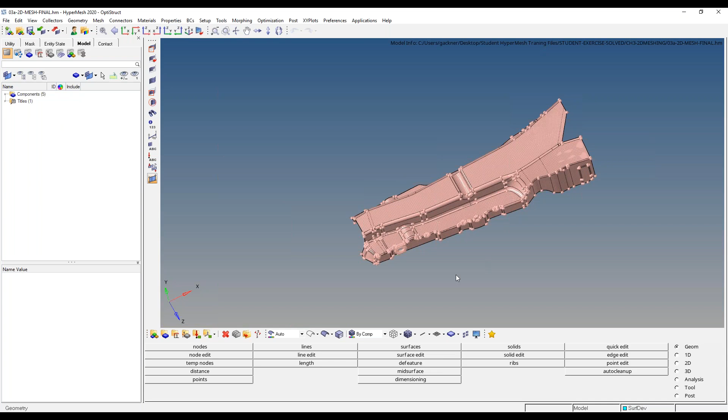Now, outside of the theory, we spent quite a bit of time learning about the 2D auto meshing tool, as well as ways we can assess element quality. And what we'll remember from that - I'm going to actually pull up the model we left off on from Tuesday afternoon together - we'll remember especially from Darius, who was good about preaching this, that an easy way to assess your mesh quality is simply to do the old eye test. Darius had described it, and I would completely agree: if your mesh is relatively aesthetically pleasing, that's a good chance for it to be a high quality mesh.

The other half I can add in here is from my mini lesson on mesh uniformity. Those of you who remember from Tuesday know there were a couple different ways we could think about mesh uniformity. One of those being: are each of my elements as uniform and identical as possible from one to the other? And at a bigger scale, are features like fillets and holes being modeled and meshed the same way as they repeat throughout the part?

Both of those ideas of mesh uniformity are rooted in the same thought: you want as many apples to apples comparisons as possible in your FE work. You want to feel confident when we see results this afternoon that the stresses I'm seeing in one element are comparable to the stresses in another, without having to do mental gymnastics to relate them. We want to take them at their surface value and say that value is smaller for my stresses, that's the better design. That's how easy we want the interpretation steps to be.

It's tough to see without a mesh, but when we get there together this afternoon and you see those results, there's so much going on and you've already put so much work into it. We don't want to make it any harder than it is to say, I know with confidence this is the best design, or I can look you in the eye and say the car will make it 100,000 miles or cycles. That's the kind of confidence we want when looking at results.

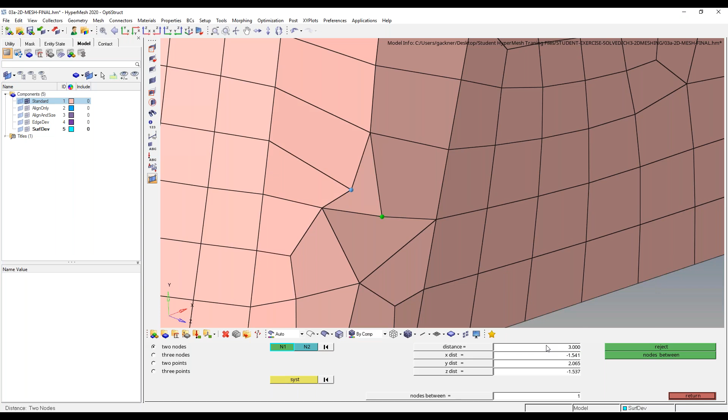Just as a very interesting example here, let me just turn around and take this quad element here and start to shrink this guy in. You could get some quad elements that look like this arrowhead little structure here where it's starting to kind of invert almost. You could see elements that will do something like this, and now it's truly overlapping itself.

Now, these are things I would not expect to typically happen, but through a combination of some manual cleanup efforts like I'm showing here that I've picked up with my own expertise over the years and some funky geometry files, once in a blue moon, you can see some pretty catastrophic things there.

So certainly something as porous as that, where there's intersections and overlaps and all sorts of twists and pretzels thrown in the mesh, a lot of times the solver won't even bother to go through with the rest of the job submission and just say, listen, man, the mesh you just gave me is trash, it's garbage, it's no good. I don't want to solve it. You got to fix this up. And usually solvers are good about telling you the element number that failed and little things like that. But that's the approach we want to take with it.

So you might hear people talk about quality either in terms of its worst element, like I've described, or another common scheme could be talking of element quality in terms of percentages of elements that meet a threshold. So I've worked with some of my customers that'll do it where they have a very strict quality requirement where 90-some% of the elements need to meet that requirement, and then the remaining 10% just needs to meet a very, very simple threshold just to ensure that it will pass the solver checks.

So that's another way of thinking of it, a majority high quality element mesh with some poor elements. Some people only think of it in terms of a worst case scenario element threshold. Long story short, they're all coming back to the same idea. What can we do to ensure that we're getting as many of these perfectly lined up or as close to squares as possible and not this kind of junk here?

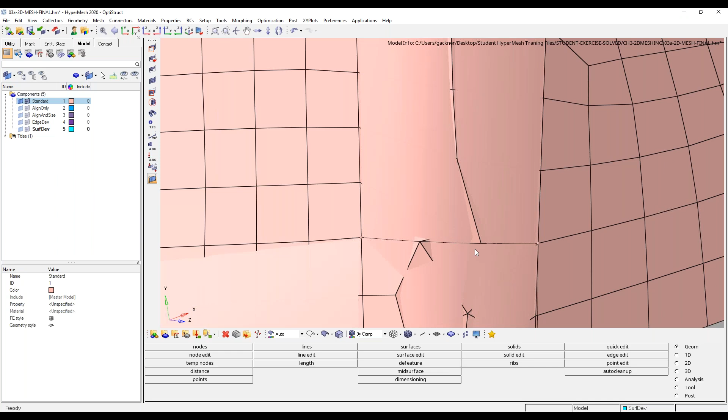And hopefully, knock on wood, HyperMesh never makes you feel that disempowered with the tool there. We want to build you guys up. I want you feeling like a superhero when you're going through the tool. In my opinion, once you are in HyperMesh, it is the closest thing you will ever get to feeling like an Avenger. I could be totally wrong. I am not Robert Downey Jr., but I feel like a God-blessed superhero when I'm flying through with HyperMesh. And that should be everyone's goal in here. And I promise you, if you're struggling through it and you think, I know I can do this, I know I can get there, that light bulb moment, it's glorious, folks, and we're getting to it.

Now, how can we actually get there, then? So what I want to show us next here, I'm going to take my Spotlight tool, and I'm going to come back into my 2D mesh menu here. I have shell elements on the screen. I have 2D elements. I want to continue to work with those. There's a very helpful tool with editing an existing mesh, and it's kind of hiding here in my second column to the right here.

So again, I'm in that 2D menu, column over to the right here. There's a little hiding tool in here called Quality Index. Quality Index has a lot of great kind of macros built into it for us. Now, it is a two-part tool. It's kind of both whole and parts. It's not just one or the other.

And how this tool works is it allows me to establish a quality threshold or a quality criteria that I'm interested in, so that it actually comes in here and lets me establish my quality threshold for failure. So I mentioned earlier that there's some files in there that you might remember from Tuesday that actually store this quality criteria, and it's that same file. So we learned about a preference and criteria file earlier on Tuesday that can be used to drive geometry cleanup.

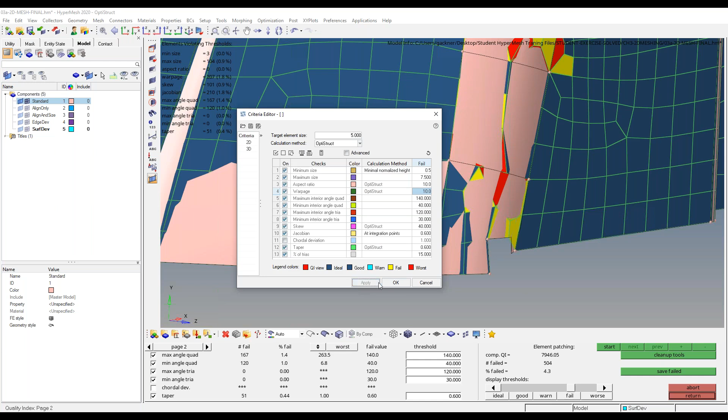So maybe I want to make sure all of my elements are at least 0.5 millimeter in size. I want to make sure my aspect ratios don't exceed 10, and I also want to make sure my warpage is no bigger than 10 degrees. I can establish those thresholds right in this file and hit OK. Why I bring that up is when I come back into my quality index tool, this quality threshold that it's showing here is pulling it straight from that file.

So why I like this is if there's only a couple checks you're concerned with, right now we're just going to consider minimum size, aspect ratio, and warpage, and I'll leave Jacobian in there too. We'll just do those 4. I can actually just turn off the rest for now. And now what I have is just a very easy way to assess my mesh quality. So actually what this tool is doing is it's updating the contour to show me elements based on their quality.

Any element in red has already failed the quality criteria. Any element in yellow hasn't directly failed it yet, but it isn't necessarily that high quality, and it's closer to failing than it is probably being perfect. So this is a cool tool to really help you identify where things are failing.

And I know it's kind of grayed out on the screen, but at the top of my session here, it's also listing the number of elements that are failing each check. So I'm going to just come into that preferences menu and go to my colors options.

And I'm going to not force those to be black. There we go. Hopefully that's a little easier to see now. So I can see here that most of my elements are above that 5 millimeter or 0.5 millimeter limit. Nothing has a bad aspect ratio exceeding 10, but there are a couple elements failing my warpage check and a couple elements failing Jacobian. So some very, very basic tips here for quality cleanup.

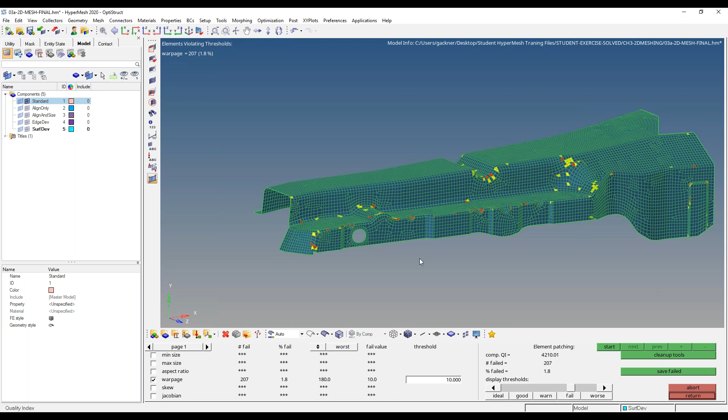I'm going to cheat here and just make that the only quality. And sure enough, all of my elements that are warping are virtually either at this curved region here, this larger fillet here, as well as these fillets down here. Now there's something funky really going on with that mesh flow there. We're going to come back and investigate that. So as a rule of thumb, warpage is typically going to happen from curved areas.

Now, if you have many, many elements on the same curved surface failing a warpage check, what that can be telling you is that you probably have too large of an element size to capture that curvature in a clean and accurate way. Let me demonstrate that for a moment here. I'm going to just hide my mesh here, and I'm going to just make a new component for reference. So this is just a new component that we're going to refer to. And I'm going to start meshing that part again at just a couple surfaces here. So I made the separate component just so that way I could keep things clean.

So one thing I hadn't mentioned yet is in your meshing tool, it'll always default with this option here labeled elements to surface component. What that's saying is as this meshing tool makes new elements, it'll place those elements in the same component that the geometry file belongs to. And that's great default behavior. That prevents you having elements in a separate component from the geometry of that component. Now, this is an example of where I want to keep it separate because I want to have a second mesh to play around with. But for the most part, it's very straightforward to keep those the same, and I would recommend you do so.

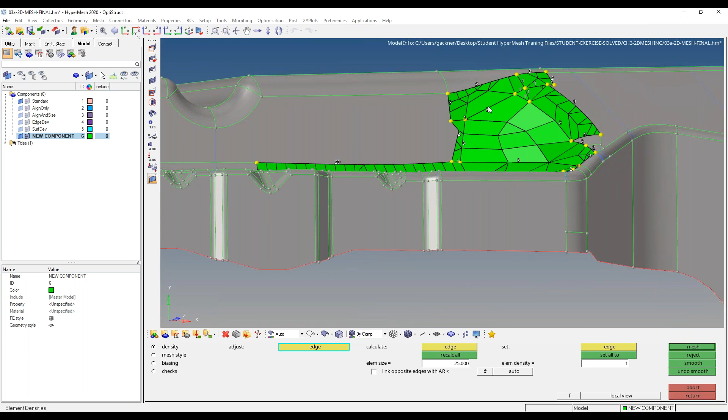So what I'm going to do is just throw on a sample mesh of a very coarse mesh size, maybe something like 25 millimeters here, an entire inch element. And I'm going to come over to this surface here, and I'm going to start meshing that. Now, certainly, it's very, very ugly. I'll give it the old college try to at least give it something that looks better here, and I'll talk about why in a moment this is meshing kind of ugly. But that is the couple elements I have to consider.

And if I come back to my quality check tool with the old F10 and run that warpage check, I shouldn't be surprised, and I'm not surprised knowing what I know, I've done this a couple times, that those are warped elements. I'm asking a straight edge to traverse across a much bigger chordal region than the smaller element to approximate curvature. It's really no different than an exercise of trying to approximate a circle with 4 edges versus 8 versus 16 versus 64.

And I think we'd all agree that you're going to have less angular deviation as you introduce more straight lines. So that same principle is happening here with warpage. So I just wanted to include that kind of thought process as an example of: the more you start meshing, you're going to really start to build an intuition on why elements might be failing. And those are also going to start to factor into your decision making on what your element size should

be. So I'm seeing here from trying to mesh this with 25 millimeter elements that maybe that's a little too big. Maybe we need to refine it to reduce the amount of warpage those elements are seeing. So maybe I'll come back in here and, just for the sake of argument, bump that down to 1 millimeter now. And now all of a sudden, first off, it looks good on the eye test, and the eye test usually treats me very well. But I can also come in here and see that there's a lot less warpage failing happening.

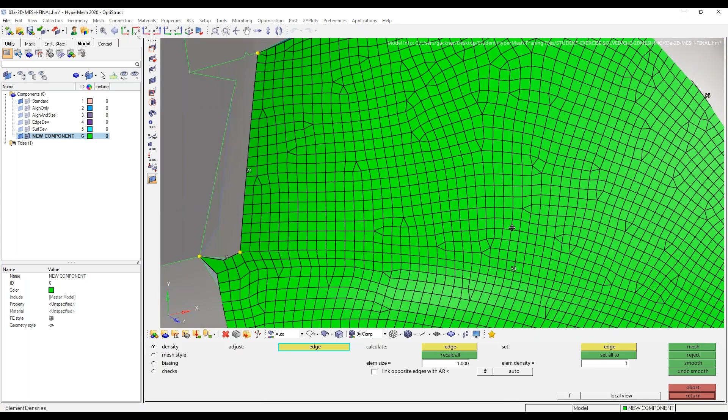And certainly, though, it's also okay if not every element is perfect in its exact size either. It's totally okay if you're going through this and you find out, yes, I'd be willing to bet these very, very small 1 millimeter elements don't warp at all. And I only have one of these guys failing, and it's probably going to happen at the very end of the mesh. Yep, it's this very long one there. But just because none of these are failing doesn't necessarily mean this is an appropriate mesh either, because I'd be willing to bet we made these elements too small, or smaller than we really need to.

As a general rule of thumb, you're not wrong for thinking that as your element size decreases, your solution accuracy goes up. So let's just pretend that we're only doing cantilevered beam models. And cantilevered beam models are nice because you can, for the most part, create them in the real world in a relatively easy controlled environment. You don't have to jump through that many hoops to create a cantilevered beam model in real life. So let's say we did one of those and we had the FE model for it. And now we want to compare our FE model to the deflections we saw with the real world model.

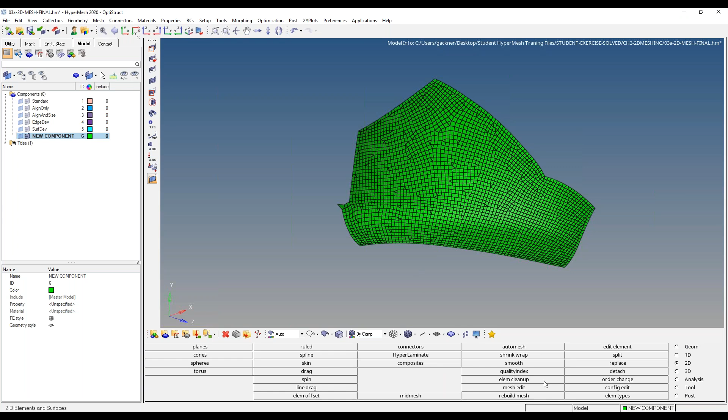Now, I promise you, we're going to learn some ways to repair these low quality meshes. And let's do just that. So I'm going to come back to this real ugly pink guy here that I just took a fat chunk out of. And I want to come down to this region here where there's all sorts of nonsense happening. This is straight no good. So what I want to do is navigate back to that quality index tool.

And we've learned how I can pair this with my criteria file, and I can actually call out failed elements for all these checks. So I want to know my really small elements, my stretched elements in terms of aspect ratio or in terms of Jacobian, as well as my warped elements. So I got just a handful of checks up on the board. I got some warning elements and I have some failing elements here though. So it's good to see both there.

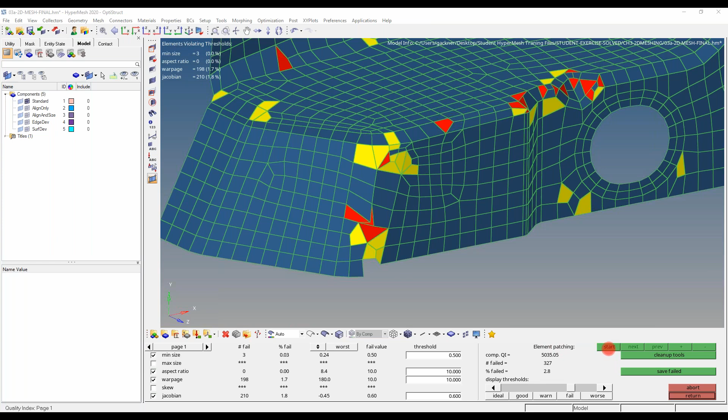Now, there's two ways to fix elements. And this is going to be approach number one we're going to learn about today. Quality index tool is great because it'll also do what we call element patching, or isolating these regions of elements for us. So I'm going to come over to the tool and I'm going to hit start. What this is going to do is start cycling me through, and I can hit next and previous to go to the next patch of elements. So I don't have to spin my model and zoom in and out to find these. It makes hunting down those few failed elements very trivial for you.

You shouldn't have to spend time doing the old spin around, zoom in and out, identify that one failed quad element of 100,000. I've called out a few bad behaviors if I find you doing them, not that I ever could, because I will most likely never meet the folks in this room. But if I do ever find you playing the needle in a haystack game trying to find a failed element, I'm gonna be in your ear a little bit about it. But fortunately, this patching tool takes away ever having to find the needle in the haystack with your failed elements, because it allows me to just cycle through these.

Not only that, hiding in the tool right under that patching tool are cleanup tools. These are really why we're interested in quality index. This is all pretty good. This is some lemonade in my opinion. I like lemonade, but it ain't making my day sort of thing. It's helpful that I can find my elements, but we already saw there's some other ways to do that. This cleanup tool business is really why we wanted to stop in the quality index tool. This gives me access to 10 different macros that can clean up all sorts of problems with 2D elements.

Some of the things I have in here, as a self-proclaimed HyperMesh expert, I use a lot of these in my own day-to-day. And some of the ones I like are this split quad element. We'll talk about why the node and element optimize tools are extremely powerful. And there's even a couple drag and collapse tools in here as well. So I'm going to start with node optimize and element optimize.

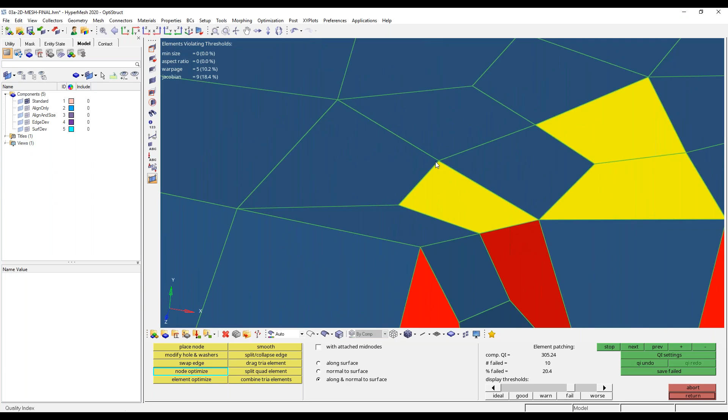So I can actually come in here and just start clicking away at some nodes, and it's going to start moving things around as it needs to. I can even let it deviate a little bit from the surface by moving normal off the surface. You want to be careful with that. Or you could let it do both normal and tangential to the surface. So there are some ways you can quickly clean those up.

I personally stay away from the normal option too, I only do along the surface. I don't want to introduce additional warpage to my model, but sometimes that's a necessary evil, you know, get it 1 degree off plane just to avoid significant aspect ratio issues. Those are the sorts of things we can do.

Now, a little more practical though is element optimize. It's the same idea, but it does all 4 nodes of one element. So I can come in here and just start clicking these yellow and red elements, and a lot of times, you know, you can get lucky and just 1 click fixes it. Now, the problem with these optimize tools is it can't always give you a good answer if the starting mesh was poor, like I'm seeing here.

But that doesn't mean we're SOL, because some of the other things I can do in here are splitting these elements. So I mentioned that there's an option in here called split quad elements. What this does, and this is a great solution for some warped quads.

Now, I would never just automatically default to, I got a warped quad, I'm going to cut it in half, now it can't warp. That will work, but if you do that for every warped quad, you can essentially double your element count in the model. So what the split is really cool for is taking an ugly quad like this that's really getting more trapezoidal or rhombus shaped than it is rectangular.

And these are good ones to use the split tool on, because what it will do is split it across one of its diagonals into two tria elements. Now, technically we went from one element to two, and if we keep repeating that, you can really substantially increase your element count.

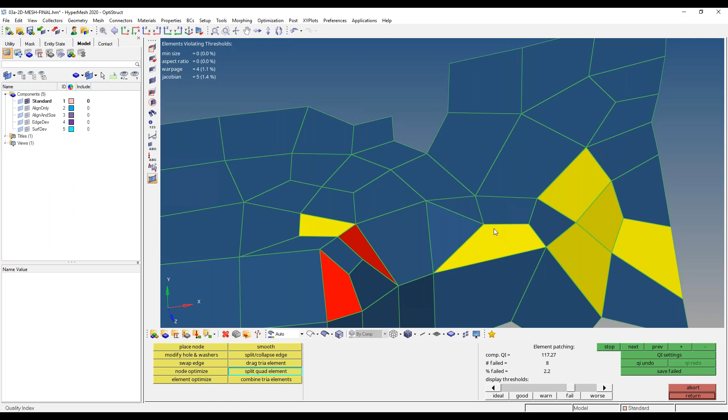So yes, this will prevent elements from failing, but we don't want to just blindly become the guy or the lady that meshes using only splitting our quads into trias and calling it a day. That is a horrible way to do things, boys and girls. If I catch you doing that, I'm going to get very upset with you, and I'm going to give you a tongue lashing.

Now, there's some other cool little tricks in here, and I don't want to do all of these tools, but there's a lot of stuff we can learn. My favorite one I'm going to demonstrate here for a moment. I'm going to borrow a mesh over here, go back to my quality index tool. There's a very fun tool called drag tria element on the far right.

I mentioned before that I spent quite a bit of time on Tuesday talking about that idea of element edge density, and how we can adjust those in the mesh tool to make sure we have ideally uniform density across edges, and that helps us get an orthogonal and quad dominant mesh.

Now, sometimes trias are a necessary evil for a given transition area, and there's a quick way to fix them if you forget to catch it in the meshing steps. So here, I didn't like that I introduced this tria element that I've highlighted in yellow on the upper right, and I don't want to go back and remesh the surface now. I just want to fix it.

So what this drag tria tool lets me do is click and hold that tria element, and I'm going to drag it while holding my left click. And it's like a zipper. It's going to open that up and just introduce all new quad elements that got meshed in there.

Those also go the other way as well. So I can certainly keep going this way, and like we saw, introduce it to the edge and add a quad. Or you could, what I call, close the zipper, and turn everything into a one-to-two transition as far as you can. So there's a lot of cool stuff you can do with that tool.

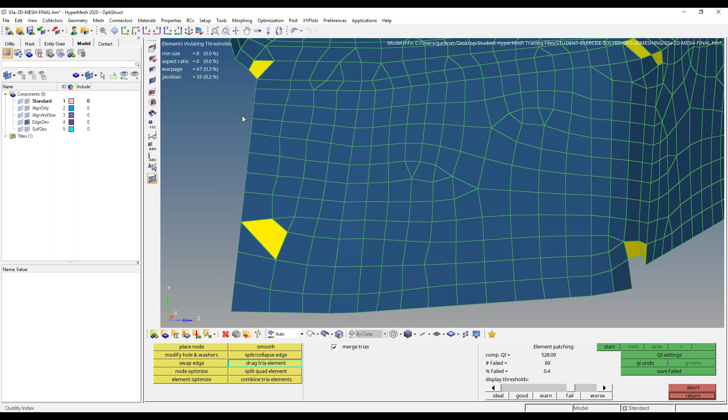That took me probably two and a half years of being on Altair to find that out, and I think I spent like my entire morning just playing around with that. It's very fun. And if nothing else, you can kind of show off to your friends, be like, look, man, look what I can do, I can make a mesh better than you. And then they'll have no idea what you're talking about, so it's okay.

Now, the other approach that I'd recommend to newer users for element cleanup isn't that quality index tool. I think what you guys should be taking away from this is a great local tool. This helps me with a couple failed elements where I can come in here and do that element optimize or node optimize, or split it in a worst case scenario to get one or two elements fixed. And that's 100% how this is intended to do.

Now, if you have something like that first mesh we looked at, this pink boy, that had all sorts of ugly nonsense on it, what this is telling me, regions like this coming back to it, is something happened at the initial element creation, and I can almost guarantee you it'd be quicker to just try to remesh it than to go back and try to make it work with some cleanup operations.

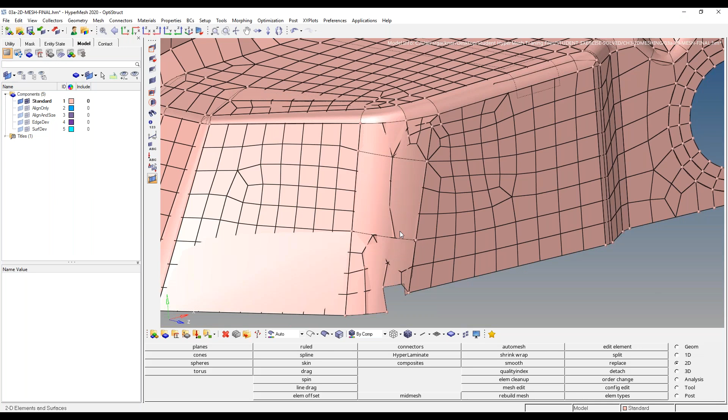So what I would do for something like this is bring the geometry back into play in your model browser. Right now, why this display looks so ugly is because we have elements and geometry trying to overlap one another and it doesn't always jive. So what I'm going to do here is come back to those surfaces that meshed poorly, and try to mesh these again.

And this is where you can adjust the element densities on the fly as you need to, and there's all sorts of things we can do there. But also, this is where I'm going to just delete a few things out for a moment here.

The reason why this also might not be meshing too cleanly, I'm sure some of you are screaming at your monitor, is because we haven't necessarily done cleanup on these surfaces yet. And that's 100% true. I wanted to come back to this to bring that full circle. FEA is certainly more Ouroboros, or a web, than it is a linear chain. Everything feeds into itself, and there are so many interdependencies on how geometry affects mesh, that I want to come back into my quick edit menu here.

This is an example where we could have taken that same toggle edge tool we learned about on Tuesday. Maybe I just left click and turn off some of these edges that were screwing this up. Same thing here, same thing here.

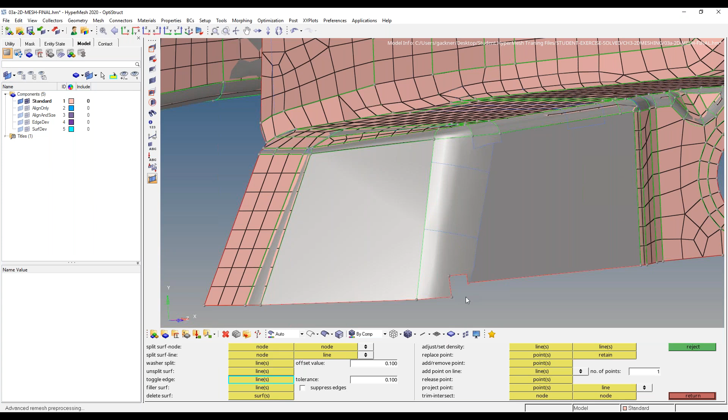And now, just for the sake of example, we also learned we can manipulate things like points. So I'm going to use my add point tool to just specify those corners again on these edges here. So I'm going to undo that for a moment. This is a rare example where I have an edge with a sharp corner that doesn't have a corner node.

You're seeing here how it actually didn't mesh all the way down to this corner. Well, that's because it doesn't know that's an actual vertex. This is something you almost have to intentionally break to happen. But I can just go back in and make sure I add my own corners.

So now when I go to mesh this, I see that the elements are going to deviate to those corners. So the lesson here isn't just that corner data is good. It should be that these point options in my quick edit menu, and again, this is that same F11 quick edit menu we've seen the last couple of days.

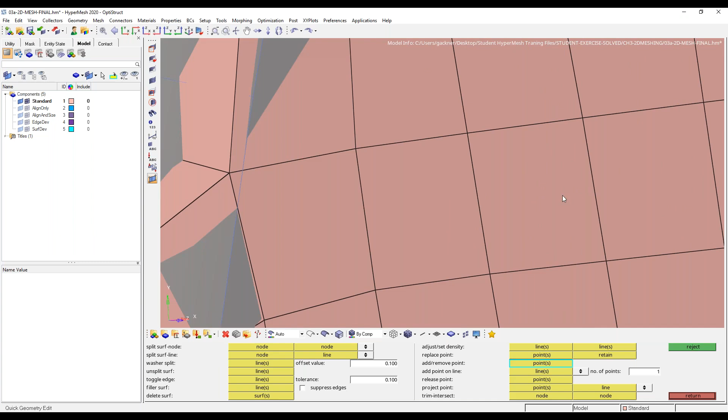This add/remove point tool, what this really allows you to do is not just find corners of edges, but literally anywhere you drop one of these points, whether it's in the middle of a surface or at the edge, it'll enforce a node to exist there. So this is a really good way to manually control mesh flow if you need to. If you don't want to use surface splits, you could also use points to kind of guide your mesh here. A cool little way to do that.

And vice versa, sometimes there are points you might want to remove if they're forcing nodes to be at places you don't want them. There's a bit of creativity to that.

Now, the final thing I'm going to do here is I like to do my own surface splits all the time. So I'm actually going to take a split from this corner that we defined, and I'm going to do that same idea of that line we turned off that goes up my screen, but I'm just going to do it as a node-to-node way that I define myself.

And now you'll see what's coming out of that operation. Now that I have this nice straight line there, hopefully we're starting to agree that the mesh you can get after just a little bit of cleanup is starting to look a little better. And that's the idea there.

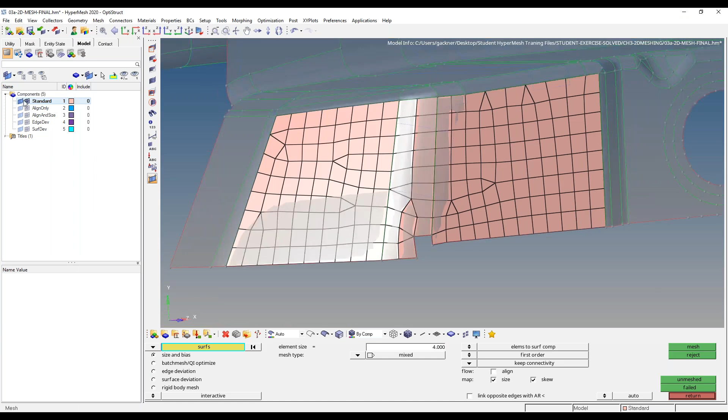So don't be afraid. I would almost always recommend you take some time to review your geometry and surface lines before you mesh. Try to identify those ugly, really squiggly shapes. And frankly, this exercise 3A is a perfect lesson on how not to design a part with meshing in mind, because there are so many things like these feature lines on a planar face that do nothing but break it up arbitrarily and get in your way.

There are all sorts of problems with this from a meshing standpoint. This is a really good thing to go back to and say, well, why was this so hard to mesh? Look at all these feature lines and start to ask yourself, or ask your designers, to make sure we're not drawing parts that look like this with all these unnecessary feature lines. I don't want to scare you from many surfaces.

Sometimes you need detail and need surface lines, but you want to use them only as needed.

I used to work for a guy when I was in high school that was the closest thing, if anyone's ever seen the cartoon King of the Hill, to the character Dale Gribble. This gentleman lived in my neighborhood. He loved conspiracy theories. He is probably an insane person. He's a very nice man, though, and he gave me $10 a day to come help him out with his dog treat business. $10 an hour. I used to work cash for this guy a couple hours a night. I'll never forget, though, the one thing this very strange man said to me. I'm still talking about it 10 years later to a group of strangers.

Everything should be on a need-to-know basis. And I remember thinking how bizarre that was, and I don't necessarily agree with it. But when it comes to surface design, you should only include edges and features as needed. You don't want to complicate your design any more than it needs to from a meshing standpoint, just to make things harder on yourselves. That's certainly not something we'd be interested in. So always remember that. Some strange man in my neighborhood when I was 16 years old telling me things are on a need-to-know basis. Your part design is on an as-needed detailed basis.

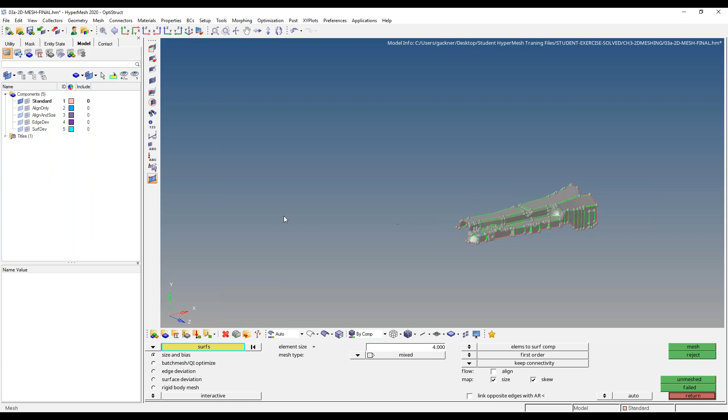Now, what I want to transition into here is a very quick, streamlined lesson. I want to introduce the basics of 3D meshing, but I don't want to get too bogged down on that. In fact, it's going to be very analogous to what we've done in 2D, just with a couple extra steps. So what I'm going to do here is put this on the back burner. I'm going to come into my training files and pull up a new lesson for us. Let me get my HyperMesh folder. In our student exercises, I'm graduating up to the 3D meshing chapter, and I want to talk about exercise 4A for a little bit.

So as a rule of thumb, 2D geometry, we can use 2D elements for. And we're going to learn today how we can use a property card to give it that thickness and actually turn it into a 3D entity. But for very oblong 3D objects like we're seeing here, and you'll remember from Tuesday I talked about this, this is a tricky part to mid-surface. We couldn't mesh this with shell elements. We're going to need 3D elements. And I think that's actually more intuitive.

3D meshing is extremely analogous to building with Lego bricks, as an example. You just have a small thing that connects to another small thing, and you do this enough times, it gives you a big thing. That's really the rough idea with 3D meshing. And 2D, and we'll see that full circle in our next lesson, has one extra step before it truly becomes a volume. Now, what does that mean for 3D meshing, though?

Well, this gives us an excuse to poke our head around into the 3D menu of HyperMesh. I'm sure you guys are shocked to learn that the 3D meshing tools are hiding here. The one that we're going to really emphasize is this TetraMesh tool. Again, it's that second column to the right. It's called TetraMesh at the top. This is going to be the home for our 3D tetra meshing. Now, if I pull up the slideshow for this particular training that we've got going on in chapter 4.

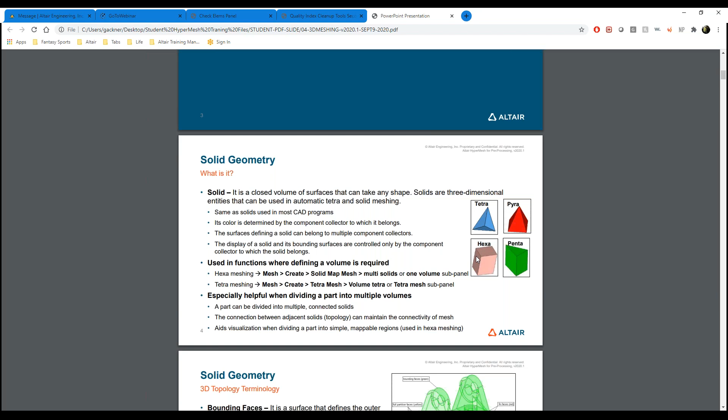I don't know if you guys are old enough to remember the bootleg man, but once upon a time, there were gentlemen that would carry burned CDs and DVDs and bootlegs that they would videotape at movie theaters very illegally, and they would just sell these bootleg DVDs out of the trunk of their car all around the neighborhood. I miss the bootleg man. He was great. That's how I got all my Adam Sandler movies growing up. I don't know what happened to bootleg man. Miss him. But don't buy software from the bootleg man.

That's a bad idea. Now, I want to talk though about how we can actually generate these 3D elements and where we are getting these tetra elements from. And that's going to bring me back to the tetra mesh tool here. Now, there's one specific requirement for a tetra mesh, and that is it needs to be an enclosed volume. So at a simple level, all solids are already an enclosed volume. That's great, but it's technically possible to tetra mesh an enclosed volume that truly isn't solid.

Think of like a CFD application where you want to model something as a very thick air, or it's got a different density than the traditional air in the atmosphere, or you want to model something as a fluid, so it's not a solid, but I think you guys get the idea. This is an example of a part where this hasn't been defined as a solid, but it's more or less, for all intents and purposes, going to function as a solid. It's really just a very technical and frankly pedantic definition in a geometry file.

Now, it has to be an enclosed volume though, and that goes back to that idea of 2D surface topology we mentioned a little bit on Tuesday. I mentioned to you guys that topology is really just a way of describing how surfaces connect to one another at an edge.

And in short, if you have surfaces that aren't correctly connected, you have a gap or a leak in your volume. And the tetra mesh tool does not like leaks. That's just one thing you can't jive with. So actually, before I even start tetra meshing, I want to make sure that this thing is eligible to be tetra meshed. So what I'm going to do is, let me borrow my Spotlight tool.

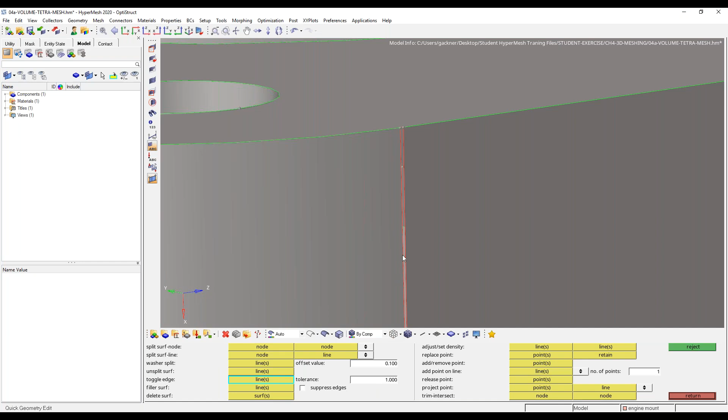The reason why, and hopefully you guys are knowing these answers before I get to them these days, is the tolerance in the tool was set too small. I was only instructing that line to smush together to another line if it found one within 1/1000th of a millimeter of it, which is pretty small there. I don't think we're on the nanometer scale yet. So I might bump this up to be, say, 0.1 millimeters or so, try to stitch that gap, still not working. So maybe I bump it up to 1, and that's when I can start to see it might get a little bit more friendly.

Now, it also is click specific, I've noticed, on where you click. So it's sometimes better to try to smush these gaps by clicking on an edge where they're physically closer to one another in a proximity sense. But now I should be good to just come in here. I've done this exercise enough to know I can just click many, many different red edges to smush them together. Again, try to click where they're already closest, like the bottom of those triangular splits. And a lot of this will fix itself.

So what we're specifically doing is we're making sure that the surfaces at all of these red edges know they're connected and that there's not going to be a leak between them at those red edges. Because if there's any red edges left over, no matter how obvious, like a lot of these are, the tetra mesh tool won't work. And that's ultimately what we're about to be concerned with here is tetra meshing. So I think I got most of these here. I'm spinning it around. I'm doing good there. So what I'm going to do next is I feel good about it.

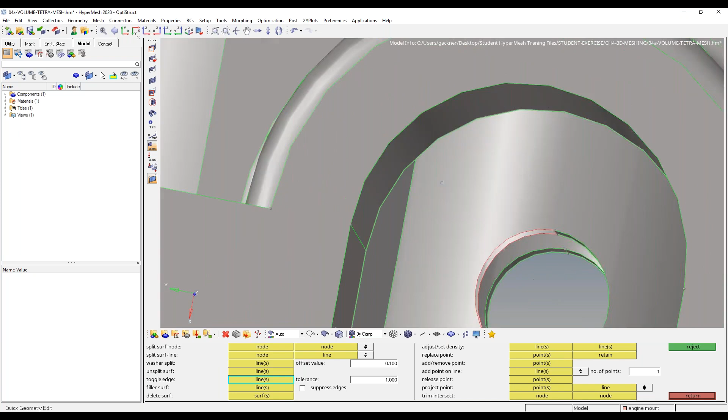Oh, we found one. Now this is a cool example for the quick edit menu. So that's a pretty big gap to close, right? I want to get this selected edge on the inside of the part to meet the other crescent C-shaped edge on the outside there, because that's a missing surface. But that's actually a really big gap to close across, and I would never recommend toggling edges or stitching those gaps bigger than about your element size, roughly, or anything bigger than that even.

It has a tendency, toggle edge, to distort CAD geometry, so very, very small smushings is okay. Big smushes, not okay. It's going to really warp and literally almost stretch your surfaces. They don't mesh cleanly anymore. It's kind of spooky. But right under the toggle edge tool, this is magnificent. There's a filler surface tool, and this thing is powerful. This thing is like the 6th infinity stone, or I don't know how many there are.

I think there's 5. How many fingers we have? 5. I'd assume there's 5 stones. There might be a 6th one. I don't know. We'll call this the 7th stone. Don't at me, MCU fans.

But regardless, the filler surface tool does allow me to come here, select one of my 3 edges, and it will automatically detect that there's a chain or a completed loop of free edges. So essentially, if you have a loop of free edges, you've defined either a hole or a missing surface. We knew that this was a missing surface, so it automatically filled that chain in for me and tied everything together.

So HyperMesh has some really cool stuff there where if you accidentally have just a really bad surface, you can always come in here to the quick edit menu, delete surfaces at the bottom, and you can come back in with a filler surface as needed to repair that geometry.

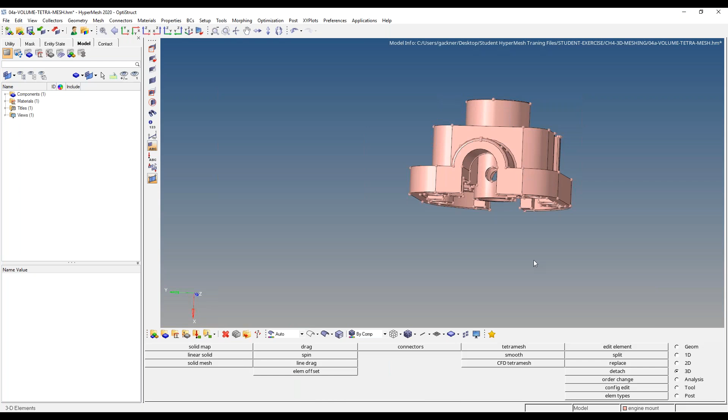If the volume Tetra tool isn't selecting your input, it isn't an enclosed volume. So the fact that nothing's happening right now, this is HyperMesh's very passive-aggressive way of telling me I don't have an enclosed volume. I'm not finished with my topology repair. So how the hell do I know where that missing edge is? Because as far as I'm concerned, when I look at this, I see green edges. And I'm not sure where that red edge is. And we might have found one here. There's got to be an easier way to find this.

And what I can show you is a nice little trick that I've kind of picked up myself. I'm going to come over to what I call my visualization options. So it's typically hiding down at your bottom toolbar. It looks like it's a lone computer monitor next to the little favorites menu. And I'm going to open this visualization tool up. Now what happened is my model browser has been updated with all these different color settings.

So what I like to do is actually uncheck HyperMesh from showing me all of my edge definitions except the free edge. So if we come back here, we'll see I've only checked the free edge, and I'm actually having it hide or not list all of my green shared edges. Now what I'm going to do is take my visualization method at the bottom here, and I'm going to set my geometry to be a wireframe geometry. So now the only things that are showing are red edges.

So this is a really easy way to identify any missing free edges, and I've done this model enough to know they hide some really mean ones on you. Like on the inside corner of this part, yeah, that's the edge they have you toggle. I don't know the Altairian that made this exercise, but I have promised myself after dozens of this training class that when I discover who made this class, that one corner free edge that they leave in there, boy, that is mean.

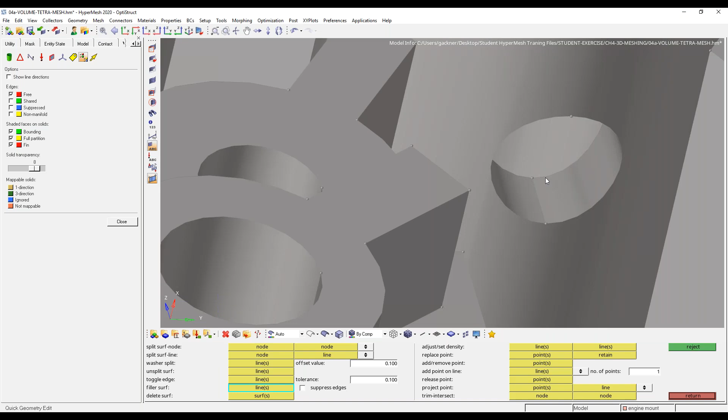Now one more time, I'm going to set that display to wireframe. I don't see any red edges, so I'll turn all of my other edges back on. And let's try that again. So what I can do is I can come into my 3D menu, TetraMesh, and I'm going to grab that volume Tetra tool. Now you'll notice when I grabbed a solid, it was able to select all of those surfaces or solids there. And now it's just a matter of a couple settings here.

The TetraMesh tool that we're using here, remember, I'm using this volume Tetra tool. So a little bit of a comparison here. There's two ways we can even TetraMesh. So volume Tetra versus, I'll call it standard TetraMesh. What's the difference? Well, volume Tetra lets me go straight from CAD to 3D elements. Skip the 2D world, I'm all for it. Let's get excited, right? All for less work.

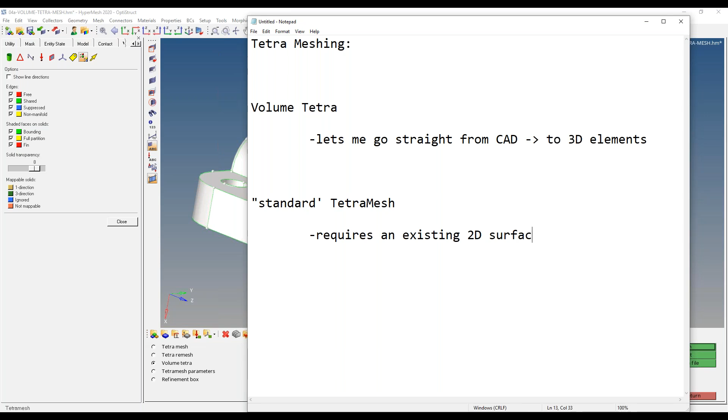Now the standard TetraMesh though requires an existing 2D surface mesh as input, and it will fill in the gaps or the empty space with 3D elements. So the pro to this, it gives me manual control on what my surface mesh looks like because I had to make the surface mesh, right? But the con that comes with that, I had to actually make the surface mesh. I don't want more work to do.

Now, sometimes the reality is for me personally, I'm almost always making my own surface mesh. I'm just very comfortable with the surface meshing tools. I know for me personally, I can get a lot of the meshing I would need to be done in up to an hour, but it's okay for newer users if that's an all-day task, and that's just how the learning curve goes, and not every part's the same, you know.

And I can tell you guys right now from my own experience, I've had meshes that should have only been 4 hours, but something went wrong and I didn't catch it right away or fix it the right way the first time, where there was a whole horror story that turned into an all-week thing. And sometimes I had things that I expected to be a 2-week meshing task with all sorts of different assemblies that only took me a day and a half. So it goes both ways.

But certainly for newer users, I'm all for finding as many practical shortcuts, not just shortcuts for the sake of reducing time, but practical shortcuts to make our lives easier are something I'm interested in. And the fact that the volume Tetra tool just lets me go straight from CAD to 3D, a lot of good stuff with that. But like we're seeing here, I only have minimal control on how individual features get meshed. Otherwise, I'd have to go in and start getting a little more specific.

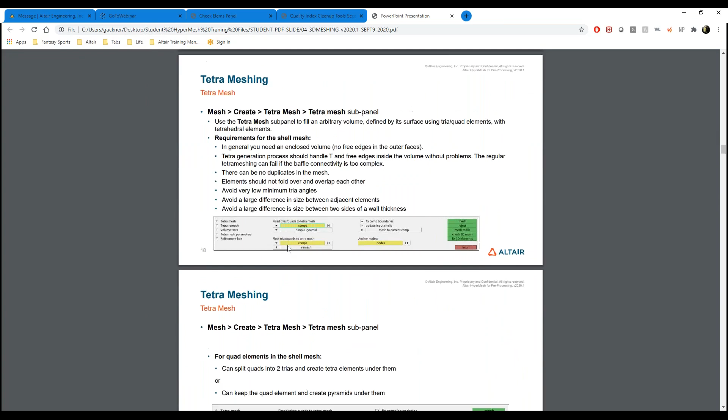Now, that said, you have still some control. I don't want to make it seem like volume Tetra is some lottery of meshing quality where you gotta really cross your fingers and, like, every 2 out of 7 tries only works out. It's certainly not the gamble that it may seem. And actually, I'm going to steal our slideshow again to help me out with this, because there's 2 major controls you have in the volume Tetra tool.

And those are a proximity control, which allows you to use smaller elements only at smaller features. So I know we've been preaching that we want to have as uniform element size as possible, and that's very true. But it's also practical to only use small elements when you have small features. And I would personally never recommend manually meshing with that in mind. You're always better off manually meshing with uniform elements in mind.

But this is a nice automated tool where it can use some logic about introducing smaller elements at smaller features. And it's also smart about how it's transitioning back to that coarser element size. Because frankly, that's really the biggest concern I have with non-uniform element sizes, is a failure scenario where you have like a 20 millimeter gigantic element pulling on a series of many, many small 0.5 millimeter elements.

That load transfer is not going to be smooth from the extremely large to the small element, and that's what I'd be wary of. Now, HyperMesh has some smart things going on where, yes, there are smaller elements than others on screen, but at least it's being good about managing the transition from those regions. And even though this violates my big mantra from Monday and Tuesday, there's rhyme and reason to why I think this is not just acceptable, but there's benefits to it.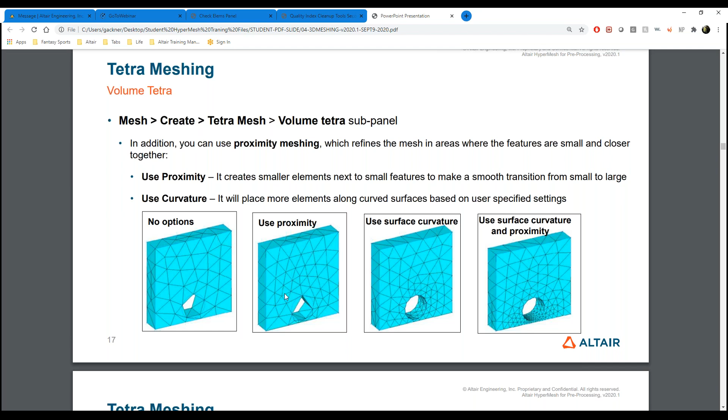What this allows us to do is better capture things like fine curvature. So without that curvature setting, it's really kind of blocky and making an ugly looking hole. We're giving it the freedom to use the surface curvature, and it's going to really capture that cylindrical feature that much better.

So the volume Tetra tool has some controls in it, not a ton, but enough to get you going here. But certainly as your requirements get more strict and you feel more confident that you can get the mesh you're looking for, that's where the standard Tetra mesh procedure can come into play. So to wrap this bit up, because I want to make sure we have plenty of time to talk about analysis, setup, and post-processing today, I'm going to showcase those 2 workflows side by side.

Excuse me there, I had a big sneeze. I didn't need the microphone to pick it up.

Now, the volume Tetra tool allows me to go straight from an enclosed volume. So now that I've cleaned up the topology and it's a watertight, airtight volume, it's selected the surface. I'm going to turn on those settings. I'll specify an average element size of 4 millimeters, give it a minimum element size of 0.5 millimeter, and let it know I want it to make a surface mesh of trias and a 3D element of tetras. So very straightforward.

And now we'll hit mesh.

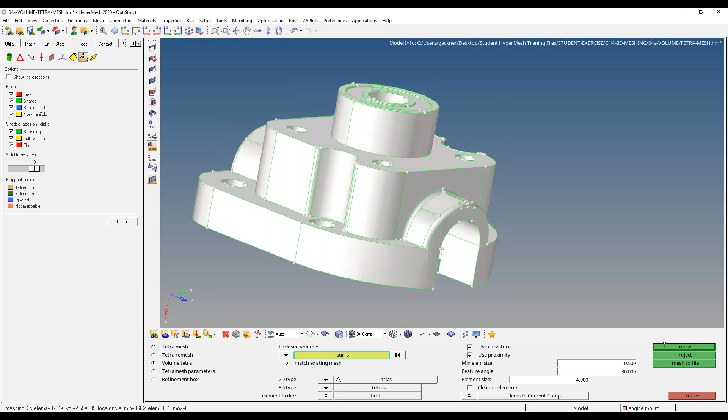Excuse me, folks. So what came out of that, and again, you'll notice in that same tool, we have that same 'where your elements going' flag. So we'll place those in the same component as the geometry. And if I navigate over to my model browser and turn off the geometry, well, that's what we're seeing. Because I used the curvature and proximity settings, I have a very small series of elements.

Now that's a little ugly. I'm going to come back and fix that myself here. Actually, Quality Index can fix that—this is a great example for this. So maybe you don't like this here, and I don't want to remesh the whole thing. I'm going to use that... well, I guess it's 3D, so it won't work. Nope, never mind, I got excited. I was wrong, folks, ignore me.

That's okay. But because we were using those proximity settings and the curvature controls, we're seeing a mix here of a coarser element size on some of the larger planar features. And as it got more detailed at those small surface fillets, it was making a smaller mesh accordingly.

Now, since I didn't mesh it myself, I can't really control for that flipped element there myself. And frankly, manually editing a 3D mesh is a disaster. I would never recommend getting too detailed with a manual repair operation for a 3D mesh.

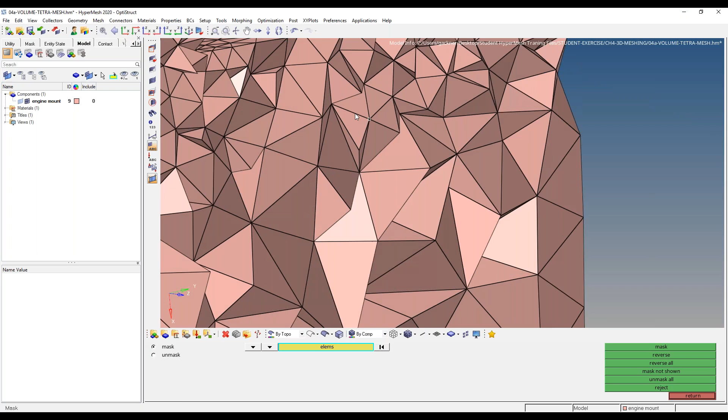Because if I just use a simple mask operation to hide half my model, this is what it looks like on the inside. So just remember that internally, when you're moving one node, it's actually affecting like 12 elements that all intersect on the inside of that. So it looks very clean on the outside, but these tetra meshes are a bit of a jungle on the inside, with all these different shards and pyramids tying together to build up the volume.

But it's actually that messiness, if you would, of all these jagged shards that actually makes it possible to tetra mesh every volume. For the most part, I have yet to see something that can't be done this way—any volume can be filled with these shards in a somewhat organized fashion. Now, it looks a little messy, but there's some rhyme and reason going on here too, and there's controls you can apply to make sure you're getting at least 3 elements in the thickness direction and things like that. But this is what allows it to just fill in any volumes.

When I said earlier that any part is tetra mesh available, well, that's why—mathematically, computers have figured out how to just fill in a volume with triangles. This has been around for a long time, probably older than myself. Just to give an example here, I'm going to delete that mesh and go back to the parent geometry, because I want to showcase what happens if I have to make my own 2D surface mesh for it.

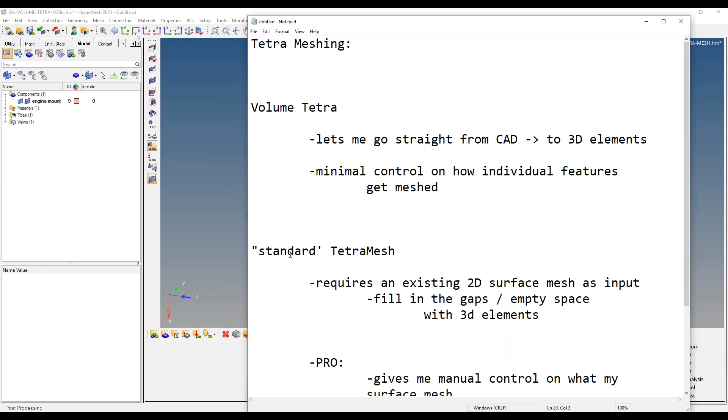So what I typically do is use my same F12 menu we've seen. Hopefully you're noticing a trend that 3D just builds off of 2D meshing. I can select surfaces, throw a mesh on there, and come in here and adjust the element size.

Now, right away you're probably thinking, well, tetra elements were so triangle oriented—why is he starting out with quads here? Why is he doing that mixed mesh? And you're 100% correct for thinking that.

So the reason, and I've always explained it this way, one of the reasons we have different mesh types is because different 3D meshing operations have different inputs. Generally when you're tetra meshing, I would recommend meshing with a mesh type of exclusively trias. It just makes things a little bit easier.

I know some commercial users I've worked with don't like pyramid elements in all of their 3D meshes. They don't want to consider them—it's just not in their company practice for how they validated their CAE tools. So rather than introduce another thing that could possibly go wrong, they stay away from that entity. There's nothing inherently wrong with pyramid elements, but that's just a very common thing I've noticed across different industries: tetra meshing is done almost exclusively with trias. So I'm going to make an all-tria mesh.

And this still looks pretty clean. Now, one of the cool things you could do here, if you look at planar regions, take this rectangular surface here—just inherent to the 60-degree triangle, it does not actually map to a boxy surface well, because the elements for a 60-degree triangle like to form this radial flower hexagonal profile.

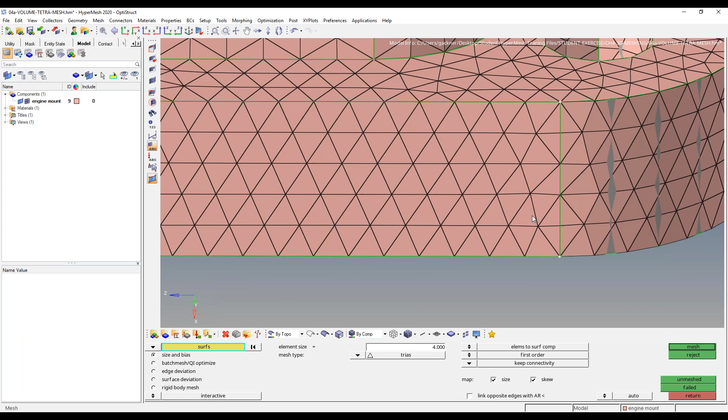What you can do to help map these boxy regions is use the right triangle meshing method, because right trias map extremely well to a boxy region where they fit the boundary very cleanly. If we look at its neighbor mesh, they start to get a little squished at the end because they don't like to map to a box region there with the right trias.

So it's okay to use a combination of right triangles and equilateral triangles. In fact, I use right trias—maybe not for something like that, but for these cylindrical faces I almost always mesh with right trias, because that helps me get this very orthogonally mapped, almost quad-like pattern.

So I'm going to clean those up myself very quickly here. Notice how HyperMesh just lets me take that existing surface and mesh over it—it just rewrites it for me by default. So I can take all those cylindrical faces real quick and get them cleaned up with my right trias.

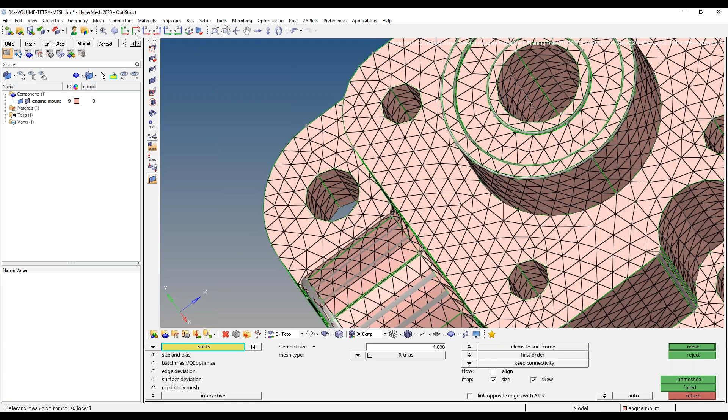Oh yeah, that looks a lot better. If you look in here, I think they look so much cleaner than if I went back and meshed that with the equilateral trias, which gives you these really awkward curved surfaces. So for cylindrical bodies, I would almost always recommend using the right tria method.

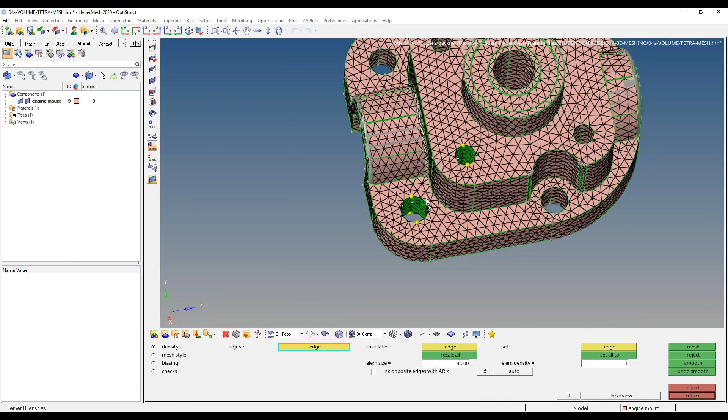Now, don't default to just taking everything—I'm sure some of you are like, I knew there was a caveat coming. At the same time, don't just default to always the right triangle, because right trias have a tendency to use more elements than they need compared to their equilateral body. The reason is they tend to map to a quad, so essentially this is just a quad mesh that got split in half and doubled the element count. So there's a sweet spot you want to find. I think the easiest way to get to that sweet spot when tria meshing is to mesh with equilateral triangles, and then as needed—mostly at fillets and conical and cylindrical bodies—come into those individual features as needed. There's our lesson for the day: moderation.

In moderation, let's only add those as needed, knowing they artificially increase the element count. So some nice things there. So what I have here is my surface mesh looks good. Just for illustration, I can take that same masking tool, hiding all the way up here, and I can just select some elements, hide it. Notice this is hollow on the inside, which makes sense. I've only meshed the surfaces, but if we went through this, this is an airtight mesh. So it's all of these hollow spaces that HyperMesh is going to fill in with volume elements for me.

Now, if I go back into my TetraMesh tool here, since I have a 2D mesh, I'm going to use the standard Tetra tool. What you do is you select the component you want to mesh to. And then this is a very important trick here: before I mesh, I make a new component, and I call this new component whatever the previous one was named that my 2D elements belong into, and I just call it 3D. So we had engine mount, I just made a new component called engine mount 3D.

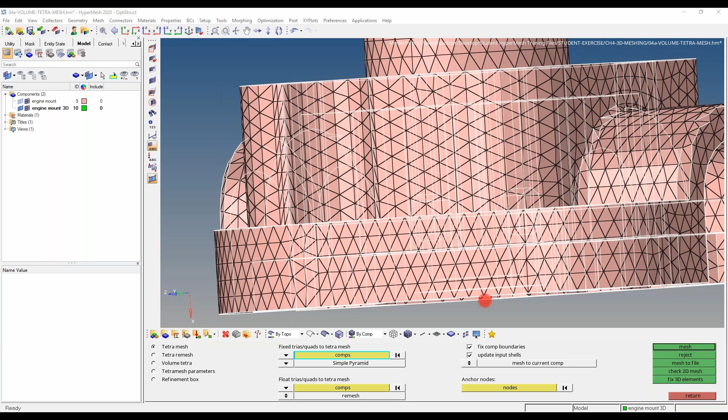Why did I do that? Well, what's going to happen is HyperMesh is going to make all these 3D elements for me, but it will not delete the 2D elements. That might seem like a pain, but it's actually a nice save-yourself-from-yourself kind of feature, because in case something goes wrong with the 3D, you always have that 2D reference point to come back to. It's kind of like a checkpoint in your workflow. And I want to make sure my 2D and my 3D are separate from one another, because we're going to learn in our next lesson with analysis setup that those tend to not be able to be in the same component.

So I've just made sure that I have a new component, the 3D one, set to be the active component. So now when I mesh this, notice how the 3D elements just went underneath the pink component, but they're their own color, in a separate component, and moving forward, it would be the 3D component that I would apply my properties and materials to, and I could probably just delete out that 2D. So it's a nice little workflow in setting that up there.

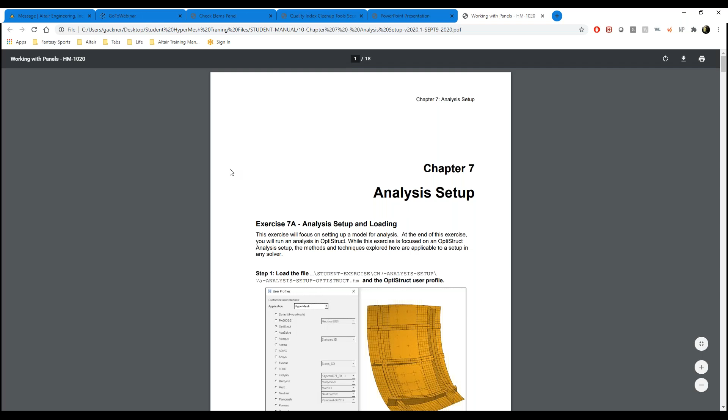Now, what we're going to learn in this next lesson, I would highly recommend folks going through this on their own if you have the time. If you go into your training materials in your student manual folder, I'd recommend reviewing Chapter 7, Analysis Setup. It's a single exercise that I'm going to go through a little quicker than most of us would prefer, but the step-by-step, complete with every button click, is included in this step guide. So don't worry too much about the individual clicks I'm going through. Let's make sure we're bringing home the theory concepts and the big picture with us, so when we have our own free time to dive into this and struggle through it at our own pace, we have a rough idea of where this is going. That's really what I want us to focus on for this example, making sure we can talk about it afterward and know what happened.

So we're going to play a game where we all now work together at a big-time submarine company. And a big-time submarine company, we make just that, big-time submarines. And we've got a mini competition going around the office where we're Team A, and we're going to go beat up on Team X to come up with the submarine design that can keep all of us alive at a depth of 1,000 meters below sea level.

So we want to make sure we're designing a vessel that is strong enough to be able to survive those depth pressures at 1,000 meters under the sea, or however deep we want to go.

Team X sucks. They've only made it 50 meters down before their vessel did not make it. Fortunately, no one was in that vessel. We're currently making fun of their prototype, which didn't make it.

And we got to stick it to Team X and show that we can make a worthwhile submarine that could survive those depth pressures. So what exercise 7 has given us is just one of many of those submarine panels. And we're going to be clever about how we're setting up the physics of the part to account for both symmetry in the design, as well as the fact that there's certainly more submarine here than being modeled. It's a very good lesson to show you that FEA allows us to absolutely work smarter and not harder. And that's hopefully what we should be taking from this.

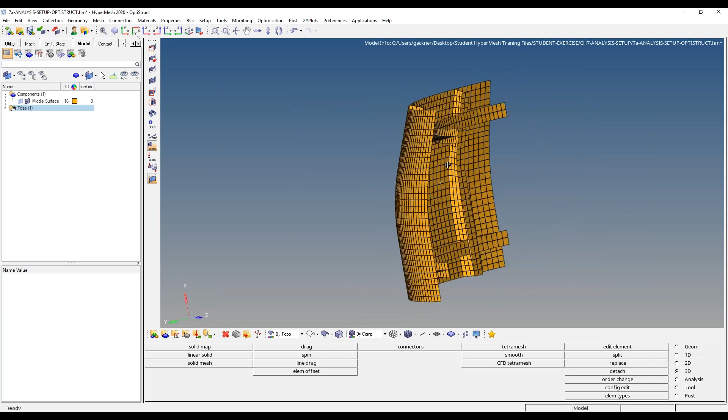So this is one of our many submarine panels. Of course, there would be more of these above it and to the right of it and to the left of it and underneath it. And this would enclose a volume. This is just one of many panels, with the ribs here included. What we need to do is make a checklist of all the things that we're going to have to define here.

So in your analysis setup, this is really what's responsible for defining both the physics of your problem and giving your mesh a physical meaning. So we're going to need the following things. We're going to need a material and its partner entity, a property, to define model stiffness and weight, right? Those are those two entities that go hand in hand. We're always going to think of them in pairs to actually give a physical meaning to the mesh file.

But on top of that, I need to know a load as well as a constraint scheme, or a boundary condition as they're often called, to define the physics that we want to model, right? We don't want to just make a really good submarine drawing. We want to be able to stick it to Team X and say, in a very matter of fact, in your face kind of way, that I know this part can survive a depth of 1,000 meters under the sea. And we do that by setting up loads and constraints which resemble the load cases that our parts would experience in the real world.

So we're going to learn a little bit about materials and properties and how those give our mesh life. And we're also going to learn how we can start defining physics in our models. And this is really the expertise there. Now, what I like about this is it's a little bit separate from meshing. Definitely we're going to be interacting with elements, but this is almost a different step in the workflow than the meshing is. They've given us the mesh to work with, so we can put our meshing brains on hold for a bit and let them take a rest.

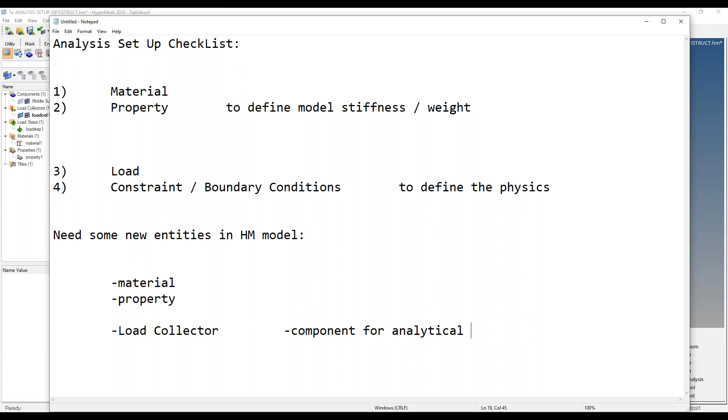You don't have a CAD file for your point force. You don't draw up a pressure load in CATIA and import that into HyperMesh. Of course not, right? That isn't a geometric entity. It's a force. It's a pressure. It's an analytical entity describing the physics of the part. But still, it needs to live somewhere, right? Like our geometry files or the brackets we're importing in, they live in a component.

I like to think of components as a house for elements and geometry. So you've got a whole neighborhood known as your model. You've got individual houses we refer to as components. Well, just like our elements and geometry needed a place to stay at night, our forces and boundary conditions and moments and pressures and gravity definitions, they have to live somewhere still, right? We don't want a bunch of homeless people on our model. That'd be awful. So that's the idea of a load collector.

It's an organizational entity which houses our analytical entities. So all of our loads, our constraints which hold the model down, pressures, anything like that is saved as a load collector as the entity, which is why we needed those. And the fourth entity we went ahead and created there was a load step. And this is really just a way to organize and pair up different load collectors.

We're going to see this in a moment here, but the idea of a load step might seem redundant at first because you've already defined a pressure, you've already defined a constraint. How does it not have enough information to solve? The idea behind a load step is if you want to have 3 different loading conditions, right? So if I come back to my submarine model, maybe no matter what, we're always going to fix the exterior nodes of the model.

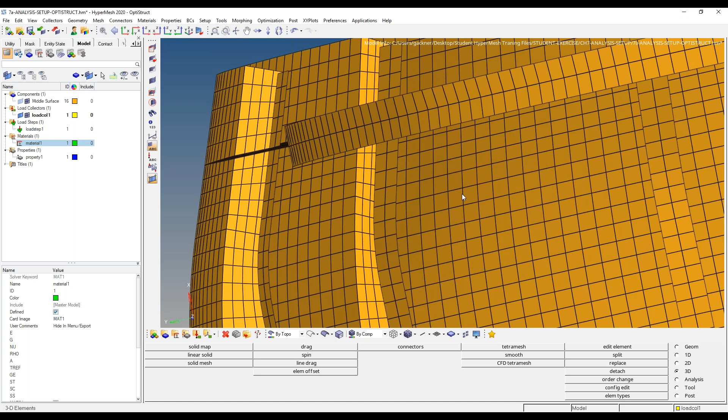So with that said, I want to make sure I'm in OptiStruct, since that's how I'm going to solve the job. So I need to first define my material here. And I promise you I will share this note sheet with everyone here in a second. Material needs 3 fields. It needs E, nu, and rho.

Because those 3 fields define the following things. Those give me stiffness, how it deforms in the form of a Poisson's ratio, right? It lets me know how an element can deflect, and the density gives me the part mass, or the weight of it. So I know from just those 3 fields in a linear material, a Young's modulus, a Poisson's ratio, and a density value can tell me how stiff something is, can describe how those elements can deform as they're loaded, as well as tell me how heavy the part is as a whole.

So when I said a mesh doesn't know shit on its own, that's what I meant. The mesh didn't know how stiff it was, how it's going to deform, how heavy it is. It needs a material definition to apply the scalar numerical values to it in order to actually have those physical properties. So that's the idea behind a material.

Now the property card is what's going to be responsible for turning a 2D element into a 3D object or volume or solid, however you want to think of it. Because right now I have paper thin elements, and I'd almost be willing to guarantee you a big time submarine company, not a single one of us would get in a submarine that is truly paper thin, no matter what it was made out of, right? That is a ridiculous concept. So of course we're not modeling this in as paper thin.

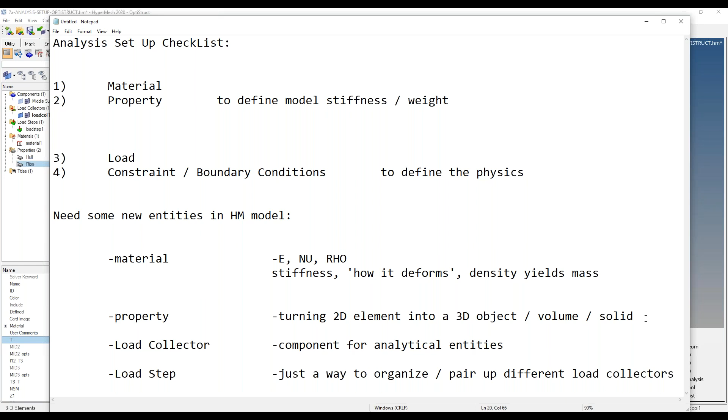That's my rib property. So again, if I come back to my checklist here, we learned that I have P-shell for 2D elements, and that just needs material and thickness to be defined. Now, the other property, I'm sure some of you are thinking, well, we can't use P-shell, it sounds like, for your tetra elements. And that's 100% the case. What we use instead is a card image called P-solid for 3D elements.

And P-solid is almost redundant. You literally only need to define a material by default. There's a couple other flags in there for working with non-isotropic materials. If you want to have the part be non-uniform in that sense, there's some ways you can manage that. But P-solid just needs a material definition.

So how, again, this actually turns a 2D element into 3D here. We're going to play one final game of Pictionary together, folks. I know, I'm hearing all the groans in my head. Now, consider I got a flat sheet of paper here. We'll do a top-down view and a side view. Very fancy. What this actually does is it volumizes by adding thickness to the top and bottom of the part. Hey, this didn't turn out too bad.

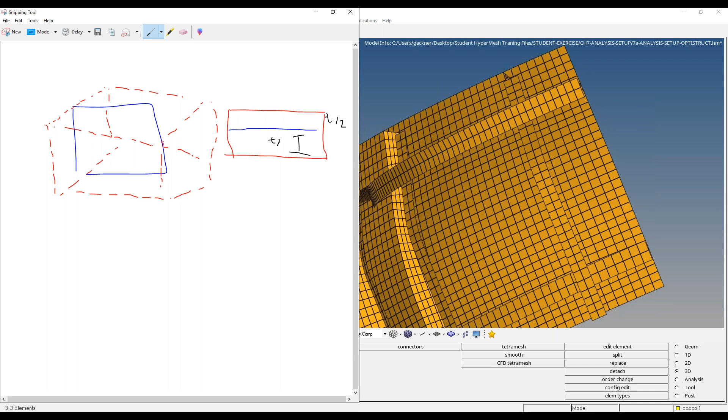So what it actually does here is it applies half the thickness on top, half the thickness on the bottom, and that's how it turns an infinitely thin piece of paper into a cube. So up here on the top, this is T over 2, and over here, we have another T over 2 as well. So that was that idea of a mid-surface.

But simply put, it takes that thickness value you have in the property, divides it by 2, makes that top and bottom. Now you have a volume, and the volume with the material definition can turn that into an element there. So that's where that stiffness definition is being derived from. So I have one property for my ribs, which has a thickness of 11 millimeters. I have a second property that I'm going to, again, tie that material to. Now, this thickness will be 19 millimeters.

It's very important you understand that for every unique thickness you have of shell elements in your model, you're generally going to need a unique property for it. So in this model, I had 2 different gauges to work with, an 11 millimeter and a 19 millimeter thick sheets of metal. I needed 2 properties to account for those. Likewise, I'm going to need to organize my model into 2 components, so that way all of these elements on the screen here can be organized by property.

So even though this is one submarine hull, and we had meshed it as one component, and it probably came in as geometry as a single body, it's okay to take one part and break it up into 5 different mesh bodies, as long as they're all connected together. Or sometimes you'll have 5 different parts get turned into one component or one single mesh body. There's various reasons, and both can be valid if you can justify it. And this is an example where we're going to turn one part into 2 components, so that way we can correctly define the thickness.

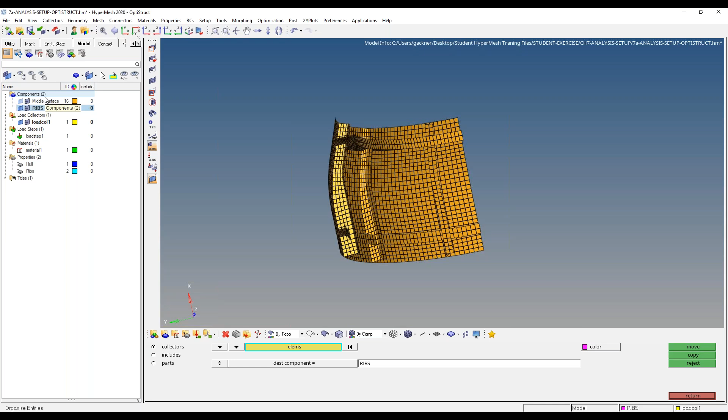So I mentioned I like to think of my components and load collectors as houses. Well, if you need to move an entity like an individual load or a group of elements from one house to the other, because maybe you forgot to change your current component when you're meshing, or we forgot that we were going to have different sheet metal thicknesses down the road, you can always move things using Organize. So what I'm going to do here is select all of my elements on the ribs and move those into the destination component labeled ribs.

So how can I do this? Well, first off, I'm going to do myself a favor and turn the geometry on. I know it's tough to see here, but if I turn the elements off for a moment, I do have surfaces here. And what I have here are all these different faces, right? But I can make that even easier for me to work with, and I'm going to do that with some selection shortcuts.

So how I'm going to do this is I'm going to select one element on this ribbed face here at the top, maybe grab its neighbor next to it, and I'll do the same thing on the opposite side, just select two of these elements. And I'm just going to do this for more or less every unique geometric face. So I'll come into this side, just grab two there, grab two here.

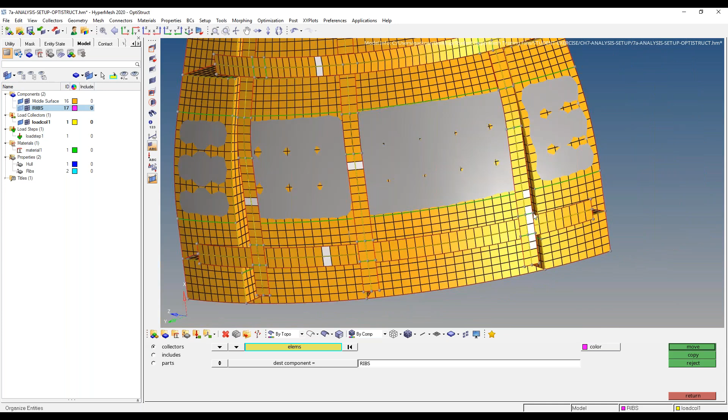And you don't have to do the back side, of course, because it's the same element. They're flat. But if I do this a couple different times, and you can do this the other approach as well, I'll talk about that in a second. So I just make sure to grab all these faces the right way.

And again, I'm not clicking everything. I just need one on a face. I'll show you why in a moment here.

We're going to do some voodoo magic. Or I suppose magic. I don't want to specify. All magic is good magic.

Now, what I'm going to do next here is I have all these faces sort of selected, right? But I don't want to go through and click 300 elements. I'm going to get carpal tunnel, and I'm going to yell at you if you do that. So now that I've pre-selected some of those faces, I'll click the yellow elements panel. And there's a shortcut option down here called by face that will allow me to select elements by a face.

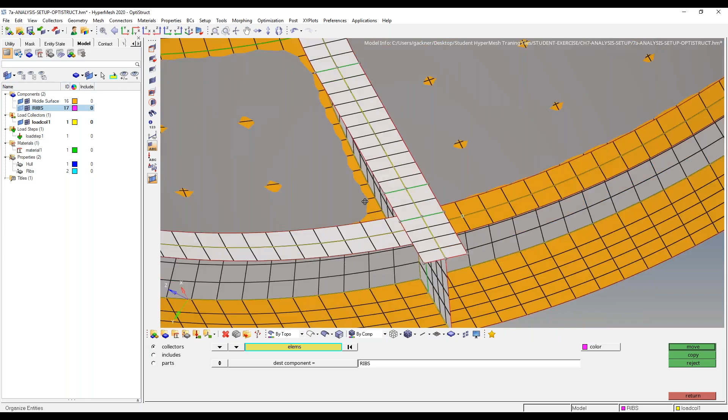So now you'll see that all of the elements I already had selected, it just went ahead and grabbed all of the remaining elements on their face to my selection. So there might be a few in here I still got to come back and grab individually. I'm okay with that. But that saved me a heck of a lot of clicking there. Now I'll come back for those separately, but once you have it selected, you can choose the destination component and move those elements to it accordingly. So I'm just going to come in here and wrap that up.

And now what I'm left with, hopefully, as I kind of speed this up here. Of course, I've seen people do it the other way where they've selected the exterior of the hull and moved those to a different component. Either works. As long as we get the end goal the same of I need my ribs in a different component from my exterior hull elements there. That's the only thing that matters, and that's what we have here.

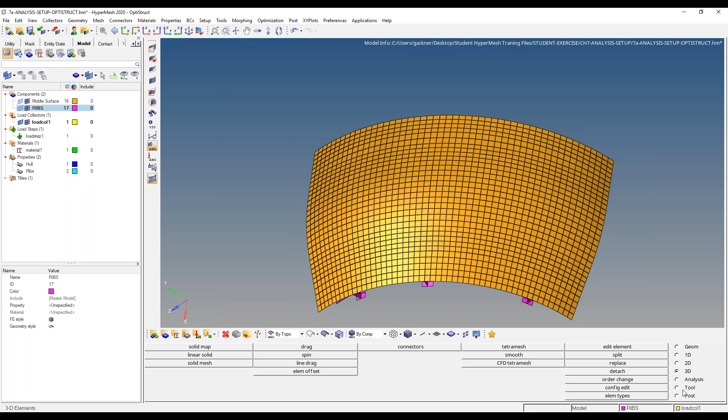So I think the exercise, if you do the step-by-steps, will have you take like a patch of all those elements this way, just kind of approximating it, do elements by face, and that's a way you could grab the exterior out. Tomato, tomato, if you want to do remove A from B, remove B from A, more power to you. Might be a good idea to figure out how to do both and get comfortable with it. Now, either way, though, I want to come back and reiterate why we did this step, and that's because of how we actually apply properties to our components.

So coming in here, I'm going to take this middle surface component. This is my exterior hull, so I'm going to rename it. And we're going to call this outer hull. And now what I'm going to do is in that little entity editor, the window under my model browser, I can see that I have outer hull selected. It's component number 16. It's colored orange. I have a property I can assign to it.

So this is where I'm going to click that unspecified property, click the yellow panel, and I'm actually going to call out that hull property we've already defined. Notice the material definition follows suit with it. So it's a nice little system where the material feeds into the property feeds into the component, and now every element within this component is going to receive that material definition, kind of like a big water slide.

Let's do the same thing for the rib, right? I have a rib that needs a property. I'll point out the shell property. So now it knows that these elements have some thickness and that it's that same material there. So now what I still need to do, though, is define that material. I mentioned before that we're going to only define Young's modulus, nu, and rho.

HyperMesh defaults to a unit system of megapascals for pressures, millimeters for length, typically, seconds for time, newtons for forces, and here's the real kicker, the megagram for mass. So the megagram is in there just to make sure that you're still getting pressures in megapascals. So that's why they use this funky system here, millimeter second newton megagram, because it's easier to work with megapascals than pascals or something else. But we're going to try to remember that default unit system.

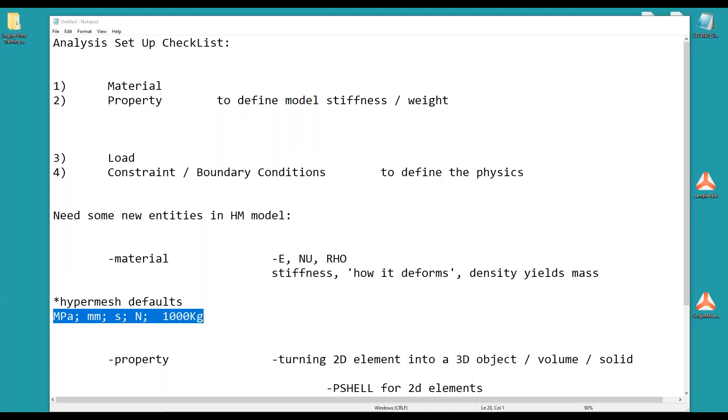So what I'm going to do is come into my material and I'm going to rename it to be steel. To make things even easier, the default MAT1 material definition is steel in the above unit system.

So if you're ever really confused about units, and I don't blame you, that was probably the hardest part for me when I learned FEA. What I'd recommend doing is come into your favorite search engine, won't tell you which one you got to use, but just look up things like FEA unit systems.

There's all sorts of third-party literature, and it's not my place to recommend, but I had actually this exact chart here. It's so funny you can pull this up still. I remember this from like 8 years ago when I was first getting into this. They have this little chart that shows you the same steel material and unit definition in like 12 different unit schemes. So if you're ever confused on what value you need to be working with in a different scheme, they have a sample material redefined like 10 different times for all these different schemes to help keep it clear. I used to have that taped up over my little desk at my research job, and that helped me get through things.

What I would do if I were you guys, a little bit easier, is just know that these default values it recommends when you come to any of these fields—I didn't type in that 210,000. That's 210,000 megapascals of Young's modulus, which we know is the stiffness of steel. So it's actually always going to give you the default value for a steel material. And if you're wondering why the density is at an e to the -9, just remember this is in megagrams over millimeters, so it's going to get all messed up with all sorts of zeros in the way there.

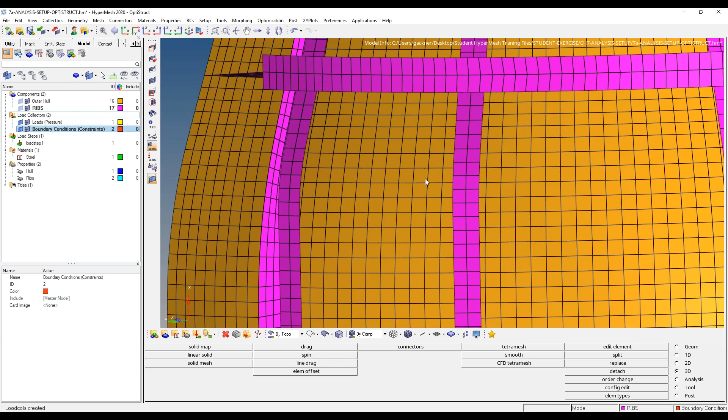So that's what we're going to do here. Now I told you guys before, we're going to do a cheat code here, and we're going to see how we can be clever about our constraint scheme to model the fact that there's more submarine hull included in this model. So how can I do that?

Well, first off, I'm going to make my pressures my active collector, the current collector. Notice how I right-click the pressure load and make this current. So the first thing I'm going to do is define my pressures to get that out of the way.

And I like my pressures to be purple. The first gentleman I worked with at Altair had an extremely picky model requirement where my constraints had to always be yellow, my forces were red, pressures were purple. There was all sorts of this ridiculous color scheme, and I don't know why, but it has stuck with me till this day.

So what I can do is create a pressure load, right? And you guys are going to love this. All of our analysis entities are created from the analysis menu, and the one we're most concerned with is this second column on the left, which has our constraints, forces, moments, and pressures - our most common entities we work with.

So I'm working with pressures right now, and I'm a little confused because I don't see a yellow panel. Well, this is just a shortcut meaning it's a face of elements - defaulted to be not one element, but the entire face. So I'll come here and select these orange faces. I don't like how they built this mesh, it's a little jagged - you get the occasional lone element isolated from the group. That's okay, I got everything on the exterior modeled in.

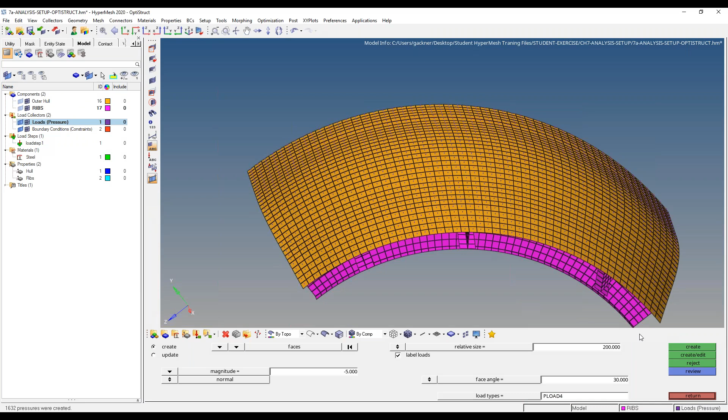So I'll hit create. I'm having a hard time seeing something happen, so I'm going to take this relative size, toggle it to uniform size, and change that to 100. Now we'll see my arrows grow. If I zoom in, I can see that the pressures are being applied compressively onto my structure, so those are pointed the right way. So we used a negative pressure.

That was good, but now we got to fix this thing in space. We need to model the fact that the submarine hull exists in our universe, which does have forces that will prevent it from just accelerating into infinity. But we also want to be smart about that and also model the fact that there's probably some symmetry on the components. So I'll do the simple way first to warm us up to this.

So first here, it's very important when you're working with these that you take the time - you have to do this, or things will get broken otherwise. Before I define my constraint, I'm going to select the constraint collector or house, right-click it, and make it current. This ensures that the new constraints we're about to define end up in the right house.

HyperMesh is like the pickiest eater at Thanksgiving. It doesn't like its mashed potatoes touching its turkey, touching its stuffing. It likes things very separate based on the entity it is. So in short, pressures and constraints go together, but they don't like to live together, kind of thing, right?

They got a good carpool thing, but once 5:30 hits and they're home for the day, they stay in their own home. So likewise, I have my constraints organized accordingly in their own component. And like we saw, if we ever screw that up, that organize tool can move more than just elements. It can also move loads. Anything we create in the analysis menu, a constraint, a pressure, a force, is classified as a load, so you can always move loads as needed between load collectors. But either way, we were smart about setting our boundary condition as the current collector.

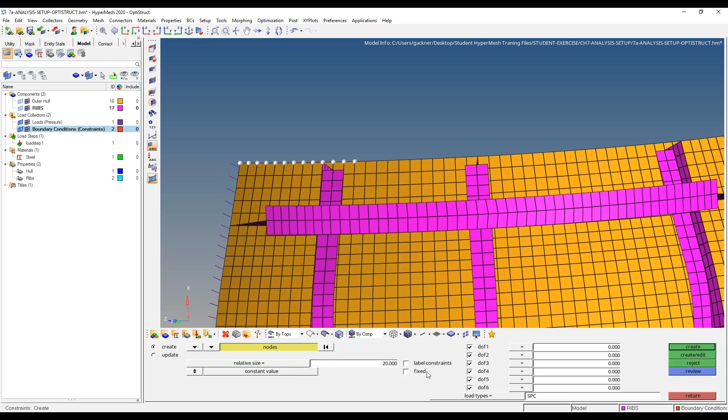Node by path allows me to click a few times, and now what I can do is click away from my selection and it'll automatically select all of the nodes that make up the shortest path to get from node A to B. This makes it very easy to select all of these exterior nodes. I don't have to click a couple hundred times, just a dozen times or so. And just like that, I was able to very quickly select all of those nodes for a constraint.

Now, the only other thing I need to do here is define how exactly this constraint is restricting motion. The constraint I'm seeing here currently has all 6 degrees of freedom turned on. In short, degrees of freedom 1, 2, and 3 are translational: movement in X, movement in Y, movement in Z. Can it move back and forth in that vector direction? 4, 5, and 6 are rotational.

Can something spin about the X-axis? Can it rotate that way? Can it rotate about the Y-axis? So really, what this means on the screen here is I've agreed to check on or control for movement in these 6 degrees of freedom, 3 translational, 3 rotational directions.

Now that I've agreed to control for those, how much do I want to allow it to move? By setting these equal to 0, that's saying yes, I want to control how those nodes move in X, and I want them to move exactly 0 millimeters. That's what we've set up here. It's not a true enforcement, it's an allowable limit, that's a better way to think of it. But for the most part, your most common constraint scheme would be constraining all 6 degrees of freedom and applying the constraint there. Those will simply restrict motion.

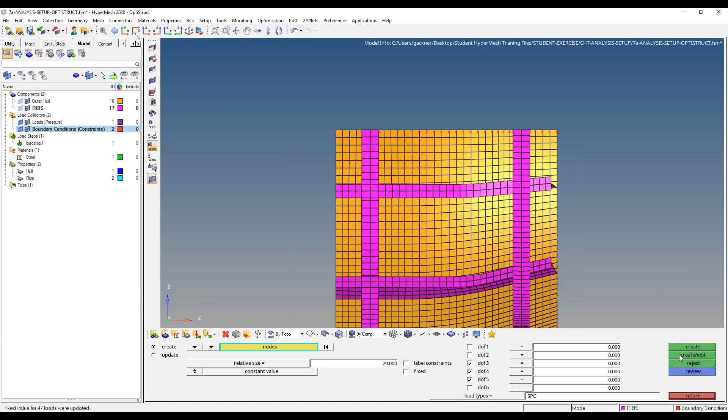Likewise, I could take my edge on the side here and only model this to be constraining it in the X direction, or where my other hull might be at the side of it. I could do that same thing for the right side of the part. Let me just flip it around though for myself. Take all these edge nodes down here, same thing, move those in X. Then the only other thing we need to do now is to take this bottom edge of nodes, and this one is going to prevent movement in the Y direction.

I don't expect you guys to become experts in that idea right away, but the biggest thing to remember when you're reading through this exercise, if you have a chance to go through it, is those degree of freedom definitions were defined very specifically with the idea that there's an imaginary panel we didn't take the time to mesh included in there. And that's why we're constraining them as such. If you're really confused and struggling to get your head around that, I don't blame you. It's not an intuitive thing. You can always constrain it with all 6 degrees of freedom, and it's more or less the same thing.

So the final thing I need to do now is define a load step, because this will pair together my load collectors and conditions. So I have a load step entity I've created. I'm going to come in here under analysis type and update this to be a linear static analysis. Linear statics are our basics of FEA. And the only 2 fields I need to supply are an SPC and a load. So I'll add that in here.

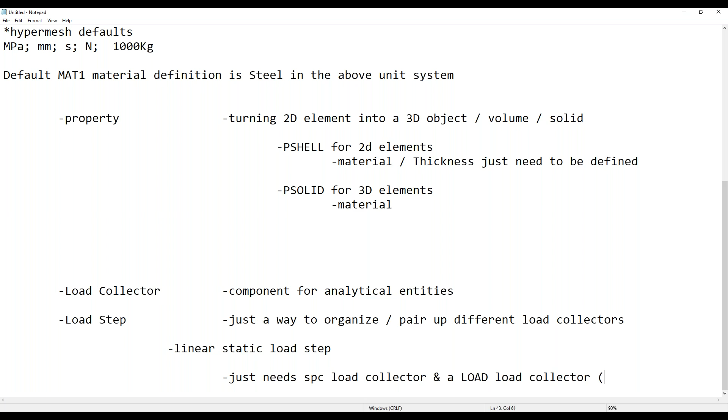So we're doing a linear static load step, and it just needs an SPC load collector and a load collector. So pressures, moments, whatever. So what this is asking me is locate a load collector with a bunch of constraints or SPCs in it. Well, we got constraints. This field for load is asking me what are the loading entities, where a pressure is defined. That's it. We're good to go.

So the final steps here, if I come into my analysis menu again, the bottom corner option is called OptiStruct. I can click OptiStruct. I could save the model somewhere else if I wanted to. And I would recommend getting in the habit of saving your model in a new folder, just because all of the run files and the result files we're going to get in a moment here are going to be saved in that location. And it just really makes it easier to have all of your files saved in one spot.

Once you submit your job to run, it's going to immediately prompt the OptiStruct menu on the screen. And the message log is where it's going to let us know how things go. So any errors, you forgot to apply a property to a component, it didn't know how stiff the elements were, it errored out immediately. They'll generally tell you in the message log. So some common things I'll see from newer users in my classes could be you forgot to apply a material to a property, or you forgot to apply the property to a component.

Sometimes people forget to adjust the current load collector, so both their pressures and constraints live in one collector and the other is empty. As a result of that, when it reads the subcase, it finds constraints and pressures in one field, but none of those in the other. HyperMesh doesn't want to make any assumptions for you, so it's just going to error out there.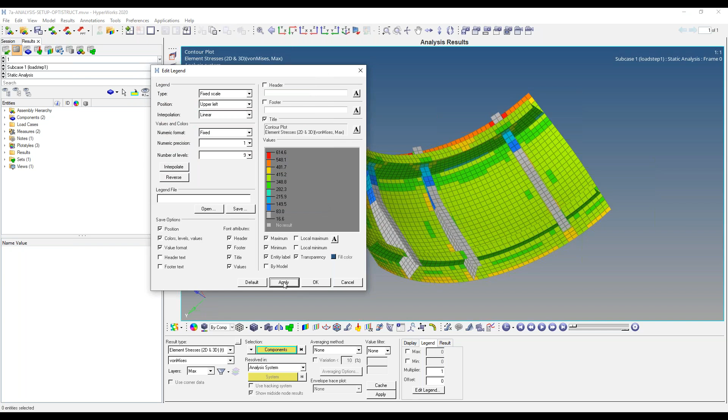And another thing you can do is maybe you have a yield stress in mind, right? So maybe whatever material we use for our submarine here yields at 320 megapascals. I'm not a big materials guy, please don't make fun of me, but off the top of my head, I couldn't tell you what steel yields at. I'm gonna go with 320 megapascals.

Right now, we're seeing one element, one result, which is preferable, right? That makes sense to us. We were just talking all about these shape functions the last couple of days in Hooke's law, and damn right I better get a result for every element.

But you can also apply an averaging method like the simple average, which allows you to blur the lines of your elements. So now what I'm seeing are stress results that are accounting for the effects of neighboring nodes and elements at each element, and my contour can blend through the mesh lines a little bit.

In general, simple averaging methods are the preferred way and the most common way I've seen from my commercial customers in using stress results. The reason for it is it gets away from being an extremely mesh dependent result. You're allowing the physics to speak up a little bit more compared to the raw mesh that you had. So it's taking a little bit of influence away from you and giving the physics of the part a little bit more influence on the result.

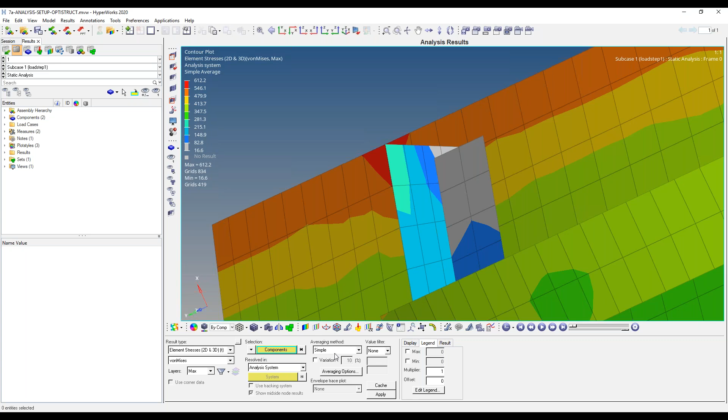But it also lets you kind of confirm the effects of a bad mesh. So what I mean by that is with a no averaging method here, I have a bright red element flaring up here. I don't know if that's flaring up because it's got a rib tied to it, if it has the boundary condition applied to it, or if the mesh was so poor that it's artificially inflating the stress values it's seeing.

Now, I feel pretty good looking at this mesh that it's probably not geometry specific, but the averaging methods can help you ensure that, because what I see from here is, while the whole element isn't failing, it's really just those couple nodes from the rib in the exterior of the part that are flaring up.

And that makes sense to me intuitively, that there's a lot going on there. That's a boundary of the part as load is transferring outward into the ribs. It's kind of getting stuck at that edge there, and that's why we're seeing a peak flare up there. So some cool things. But that didn't necessarily help me determine where everything else is that could be over yield.

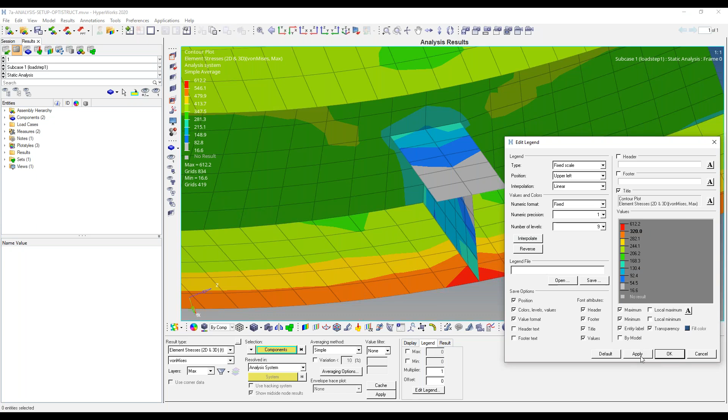So what I like to do is I'll come into my legend, and you can actually click on these threshold values. So HyperView will automatically assign the red color to be your maximum stress and vice versa. They are equidistant colors. But I can also just select my second to last color, the one that describes the threshold between the orange and the red in the default rainbow, and I'll set that to be 320 megapascals. I'm going to hit apply. So what I've done there is everything over red is now going to be at yield stress.

So again, I kind of just made up some values. 5 megapascals is probably too big of a pressure. But we're looking at this, and what we could take away from this is, you know what? Maybe we're not going to get in that submarine together. We have stresses as high as 612 megapascals. An overwhelming majority of this part is yielding at that stress. Maybe we need to go back and either add some different ribs, experiment with different property thicknesses to beef up the part, or something else has to happen for this to not yield. But right away, we were able to make those judgments.

And what I hope we're seeing is, because this mesh is so clean and so wonderful, I didn't have to worry about that mesh. Whereas if I come back into my part file, what I'm going to do here is really screw some of this up. Maybe too much. I'm going to save this guy now and resubmit just this job here, and that's the one we're going to come back to in a second to show the effect of that.

Now, while that's running in the background to show us how a bad mesh can sometimes affect results, I want to show you a few of the other basic and very quick things you can do with HyperView. There's a lot of stuff in here. Now, I'm going to reset my legend back to the default settings for a moment. Some of the other things I like to do are, next to the contour tool, we do have an ISO contour tool here.

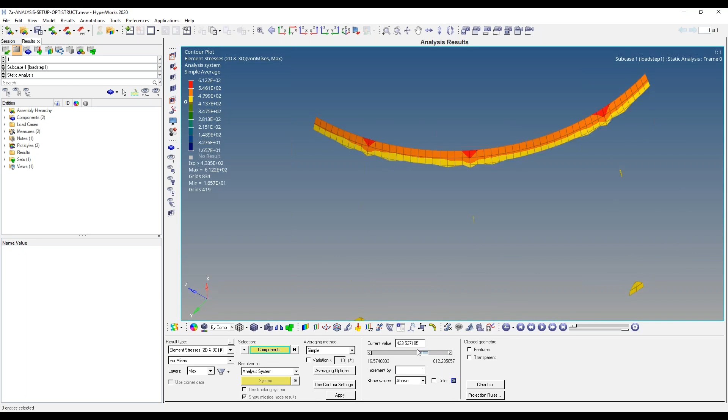The ISO contour allows me to literally throw things like my stress contours on, maybe apply those averaging methods, but I can literally hide elements with this slider bar based on those contour values. So it's a very easy way to find all of your regions over a certain threshold, or if you want to find things less than a certain stress, you can adjust the logic to be below that threshold as well. And there are some cool little visualization controls in here that you can manage, like the features or applying a transparency while you're cycling through your ISO contour.

So again, this is the ISO contour tool. It's right next to the standard contour tool. Works very much the same way, just gives you a little bit more freedom on what you're hiding and what you're not hiding there. And you can always clear that right from here as well.

Now, another common thing I see my users want to do is call out a specific measurement, right? So maybe there was an area of interest where we wanted to track the exact yield stresses. What I would do for those is work with our measure tool here. It kind of looks like a bar next to the little quotation with an X and a measure icon. This tool allows me to come in here, and first off, for any given contour, it can call out the min and max locations for me.

Again, I know it's a little tough to see on the screen. Let me try to blow up the font for you. But I can have it label for me on the screen where those high stress regions are. You can change the color of them and manipulate the fonts. So again, that's the measure tool down here. It has all of these different min and maxes that it'll default to for any given contour.

So to illustrate that, I have my stress contour up, but if I switch it over to displacement, you'll notice the min and maxes got moved. Oh, I don't have any deflection results. Oopsie.

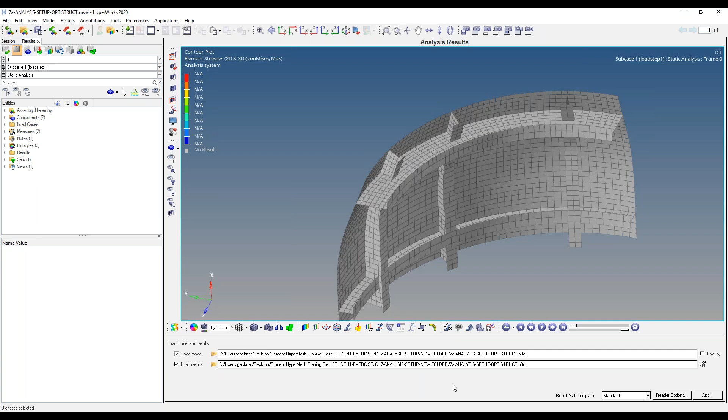Oh, I know what happened. I just saved all the results, so I can't reference those anymore there. So what I'm going to do is let's load in the new results there, since I broke it anyways. So again, this is that same model, though, if I just call one thing out here very quickly.

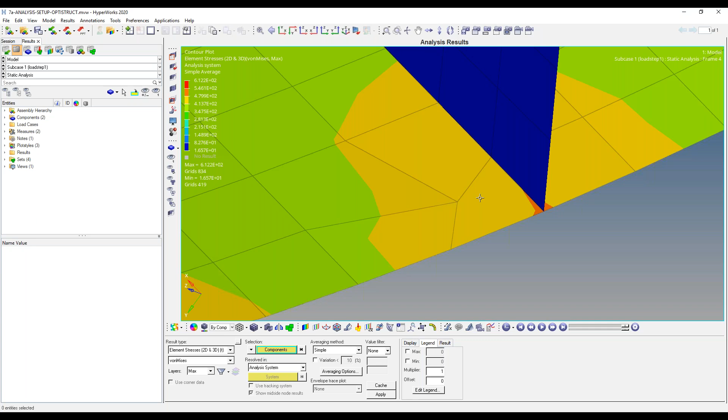So yes, this is a nice example to show how individual element shape can locally distort results. But at the same time, the averaging method in post-processing helps take away that influence a little bit to kind of balance it out. We really don't want meshing to be a volatile practice. And in post-processing, those averaging methods can really help minimize that volatility of it.

Now, we've seen some basics of measuring, we've seen some basics of contouring, but the real kind of final thing we haven't seen yet is, of course, animations as well. So HyperView does allow me to play an animation of it. Now, you're probably thinking to yourself, well, nothing's happening. So one thing you can do to help with that is there's a little tool here that's got another one of those bars with a red arrow on it. It's called the Deformed Shape tool. What this allows you to do is apply a scale factor, something like 25:1, to exaggerate the animation.

So I know it's tough to see on the screen sharing. I don't know if the frame rates come in super cleanly or not over the webinar. But now hopefully you're able to see the part that is showing that contraction from the compressive loads. Is it literally shrinking, 10%? No, but we're exaggerating it just to help us be clear on the model behavior. I could also amplify that to be 100 times. So now you're seeing it kind of crimp up.

And if I pause the animation, go to the deformed shape, this is the behavior of that model we're seeing. So it's deflecting inward, but it's trying to bend around those ribs. So if I'm actually looking at this deformed shape, this kind of makes sense to me. Now, again, we're not going to actually see this much deflection and warpage in the sheet metal. This is an exaggeration of it, but it allows you to get a better way to confirm that this model is behaving the way you'd want.

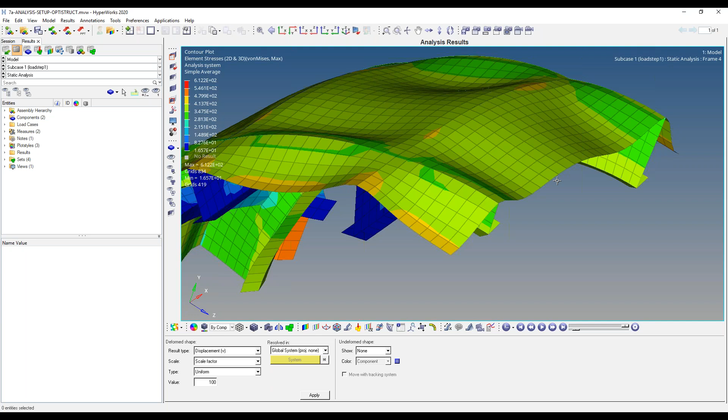And I'm a big fan of, before you even start writing down magnitude values of stresses or displacements or anything like that, make sure the physics are behaving how you'd expect, things moving that you want to move, or things that aren't supposed to be moving not moving. And what I like about this model is I'm seeing the pressure go, first off, the correct direction, but I'm seeing them want to wrap around those ribs correctly. That's why we introduced the ribs in the first place. And this makes sense to me. I could see this happening in the real world.

So a few other final things just to make your life a little bit more clear with HyperView. I know it's not the cleanest software in the HyperWorks suite. A couple things I want to note here is the file open tool is a little funky. When you open, it actually brings you down to the bottom of the tool, and it's going to have 2 fields. It's going to ask you to load in a model and a result. That's more of a legacy feature from back in the dark ages of the tool. Once upon a time, result files were not very detailed.

They used to literally just be a list of: this is element 1, this is element 1's stress, this is element 1's displacement, and it would repeat for a million elements. The problem with that definition is the result file on its own did not know the coordinate locations in the model of where element 1 was located. So a result file was just a list of results. It actually didn't contain model information like geometry or how it filled up space.

So as a result of that limitation, you used to have to load in the model itself that had the elements correctly positioned, and the result file would overlay on top of that. In 2020, of course, things have been streamlined and are wonderful and are amazing. So what we have now is a smarter result file that HyperWorks uses called the H3D. We double click it.

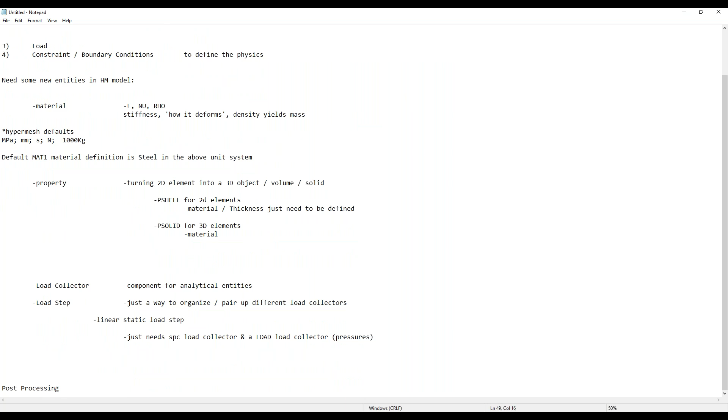So you have your .h3d, which is the result file. Remember, it's a multi-purpose doodad. You also have your .out file. This is a summary file. Any messages OptiStruct had for you during solving are listed in the out file. So I would recommend, while you're getting familiar with your first couple runs, open up this out file in something like a text editor or a notepad or whatever you prefer.

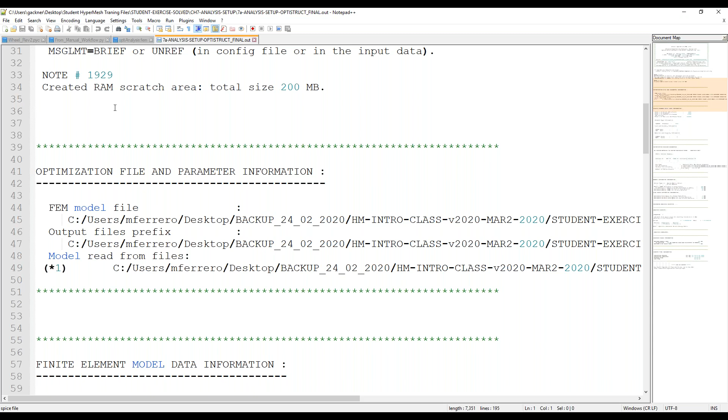And the out file tells you some good stuff. It tells you, first off, any warnings or errors are always saved in here. So if you accidentally close that OptiStruct dialog box and didn't see what went wrong, the out file will tell you. It also gives you a quick summary of things like the total number of elements and nodes and equations that needed to be solved, as well as subcase information, memory usage. So this is more for commercial users that are interested in making sure they're not overloading their machines or vice versa.

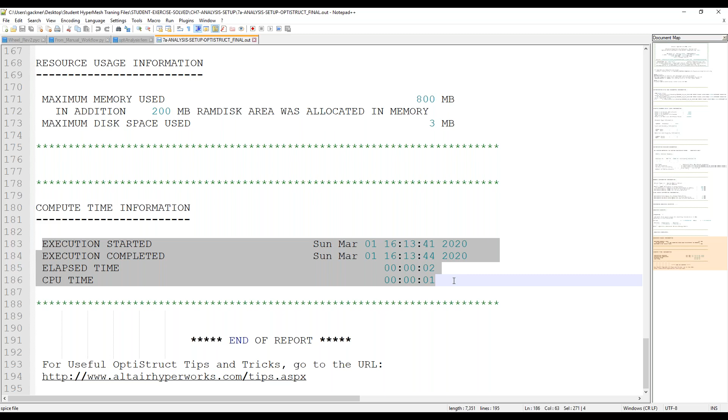So it checks some hardware specs for you, but it also has down here the time it took to solve the job as well. So certainly as you get more experience in the heavy duty jobs, keeping track of how quickly you can solve something, typically once you get past an hour of runtime, is going to be very relevant to you. Obviously, a 2-day solution is very different from a 5-day solution, or a 2-hour solution is very different from a 12-hour solution. So just having an idea of how long these take to run, this is a great way to get that information.

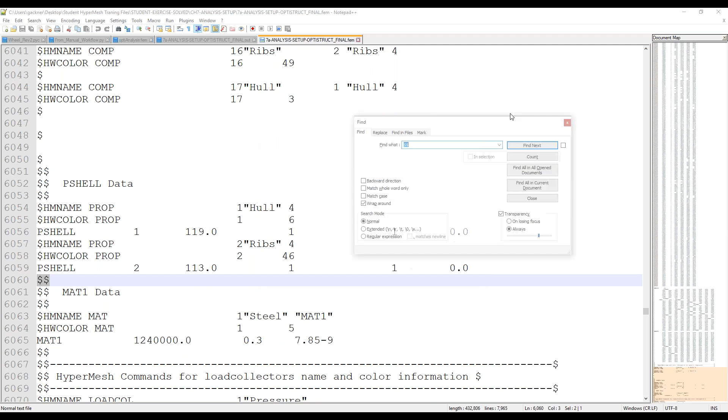The OptiStruct classes will help you learn these formats a little bit more. As an example, my steel material is defined in these 3 lines of text. I have material 1, known as steel, calling the Mat 1 card image. It has the first color red. I'm off the top of my head, I can't remember what the 5 is calling, but here is my Young's modulus, here is my Poisson's ratio, and here is my density.

So all of that definition is actually just saved in a text file that OptiStruct reads and spits out an even bigger text file that are your results. It is incredible to me that HyperMesh and HyperView have the graphics capabilities to list these millions of lines. Seriously, this is a relatively small model, and we got an 8,000 text file line input deck. These could be millions of lines. It's so incredible to me that the graphics capabilities can display all of this on screen so quickly.

So what I would recommend to you guys in the class before I let you go - not that you aren't free to leave now, frankly - take a look at these student training files, and thumb through as you feel you need to. I feel pretty good about how I taught this week. So on some things you feel you want to get shored up on or review again, come into those student PDF slides and spend no more than a half hour on a chapter.

And frankly, if you find some stuff being talked about in the slideshow that I didn't cover with you guys, feel free to put that on the back burner until you're ready to start exploring newer features or additional things we didn't cover in this class. But I really want to make sure you feel comfortable on the geometry, 2D meshing, and analysis setups, and if you need to, 3D meshing slideshows as well for the topics we talked about. Go back through those PDF slides. Don't spend all day - limit yourself to a half hour per at most, and just go back and review those.

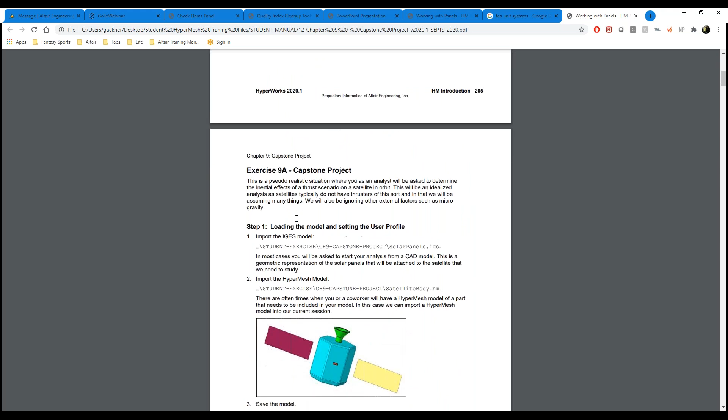We try to give it as much time as we can for commercial users, and I know it's tough here with the webinar series. But this chapter 9 capstone project is a really good self-evaluation tool to see if I'm picking up the concepts on my own. This exercise doesn't give you a true step-by-step, click-by-click guide like the other ones do, it just gives you a rough summary. It says, hey, the first thing you should do is bring in that model, the next thing you should do is this, but it doesn't tell you exactly how to do that.

I generally find that if users can comfortably get through this, and it's okay if it takes 2 or 3 tries, you've got to clean up a few things at the end. But if you can get through this in a couple hours, and once you know how to do it, it's something you could probably do in 20 minutes or so after the first try. This is a really good graduating, quote unquote, exercise.

Now, I'm not going to sit here and say you can't do this, you stink and you're never going to figure it out. That's absolutely not the case. I'd really discourage you guys from thinking of your success in such a binary way. But this is a really good evaluation exercise I've used in the past.

So if you're feeling confident while going through some of the more workflow-specific exercises, there's one that's kind of a put-it-all-together. And I'm warning you guys now, this is a bit of a challenge with the class, there's definitely going to be some steps you hadn't seen from this class there, so I apologize in advance. You might want to go back through some of those other sections we either glossed through or skipped over entirely to get the gist of it. But this is one way you could try to think of a self-assessment for that.